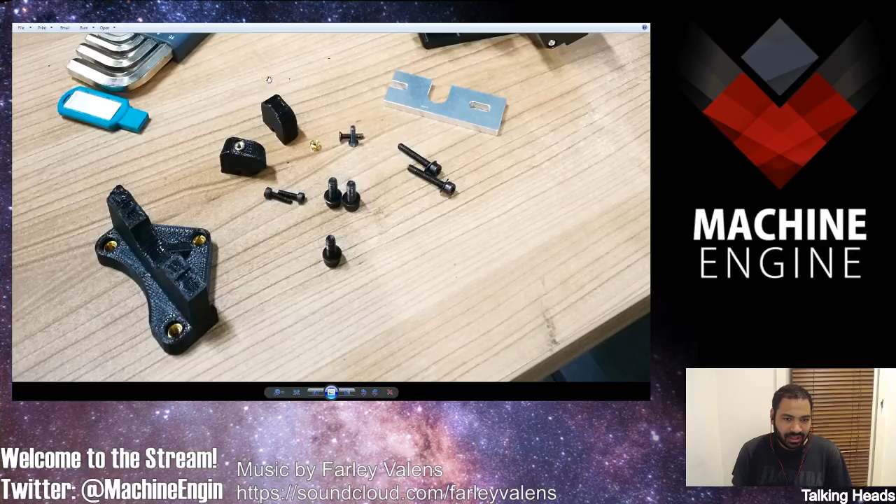Anyway, so the printer totally busted - the print head was just loose. As you can see here, this part is like broken in two, no idea how this happened. Completely insane situation. I took it apart and you can check it out here - this part is supposed to go here, this part is supposed to go here. Completely busted, the printer head, yeah.

And here's the extruder - well, this is the extruder right here, it goes in there, comes out here. Here's the motor where you put the filament in, it goes down there. So yeah, no idea what happened here, man. Completely crazy situation.

Yeah, this is the part that broke - it's actually the mount where the printer head and extruder sit on. So here you see the broken pieces, these two. Some heat inserts that I took out. This is what it's supposed to look like - I just put this part on top, it's not finished. This is still broken, and here you can see a whole piece totally fell out of it. I don't even know where that piece is, it's somewhere, I have no idea.

So yeah, completely insane situation, the printer's busted. Don't know what happened. Luckily, the makerspace we're at does have other printers available for us. We just have our own because, whatever, we had this printer before we joined the makerspace, so I had the part printed on one of their printers.

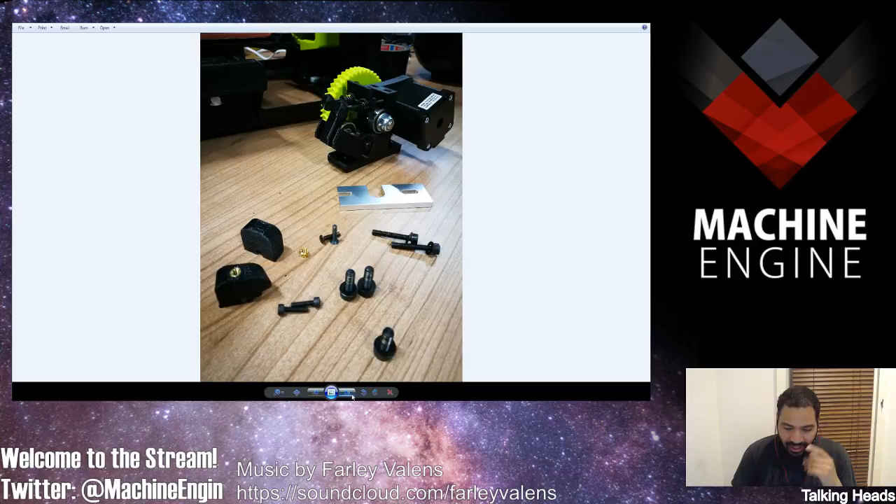I couldn't fix the printer the same day, even though I tried because I wanted to print it by the end of the day. Didn't work out, so I had to pick up the print the next day. Completely crazy, but I did manage to borrow their printer, because they had 2 printers at the makerspace available for us. So I borrowed one to print a new part for the printer, and I borrowed the other one to print out what I was working on, because I wanted to print the new module for the car.

Let me see, where's it at? Yeah, okay, yeah, so let's go back to Blender.

So this is the current car, not this part back here, just this front - this is what we're gonna be working on. This is the current car, it's pretty crappy - you just screw the wheel onto here. This is the wheel, it's pretty shitty, it's crap.

So this is what we're gonna be replacing. I have the new design here, way more robust. I have some ball bearings that I installed in it.

In this version, I didn't model the wheels correctly, so the wheel size wasn't the real wheel size - it wasn't very accurate. In this new model, I modeled the inner wheel, the outer wheel, and the tires. This is the rim of the wheels, and these are the tires. I modeled them correctly.

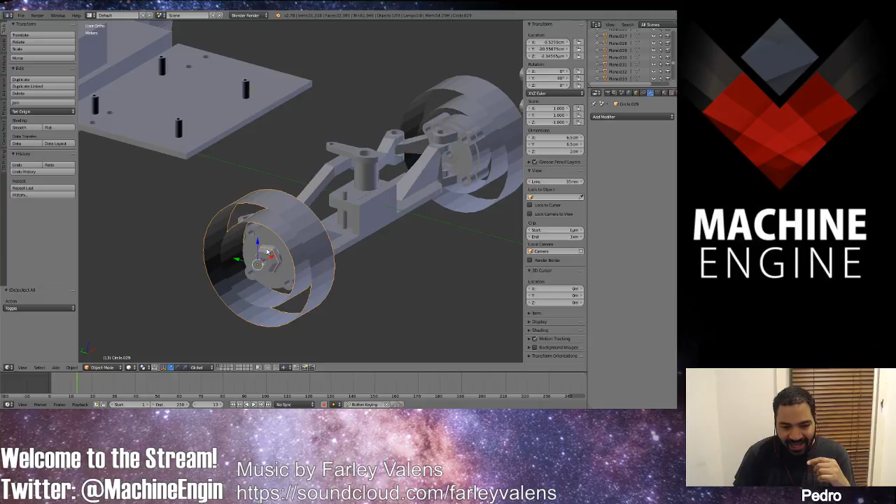I also modeled this hexagon line here - that's where the wheel sits, that's where you connect the wheel. So now it's modeled correctly. If you go to wireframe, you see that the line sits exactly on the part. Maybe you don't see it, I don't know, but yeah.

New part - let me see, yeah, the new parts are more robust. Look, it's kind of big, it fills the entire tire. The entire inner rim is filled with this new part.

The reason is that we didn't have small ball bearings lying around, I only had really big ones. These are 22 millimeter wide in diameter, 22 millimeter diameter tires. So yeah, that caused an issue because I couldn't really make it small - that's why it's this big. I didn't have anything else lying around.

But actually it makes a nice aesthetic, I kind of like this big part. Oh yeah, it's like, you know, robust. So yeah, that's the suspension there.

There's a servo. I'm still not quite sure on the placement of the servo, gonna have to look into that. Oh shit, not that, oh stop - okay sorry about that. Because the servo has to move this steering column, to move it back and forth.

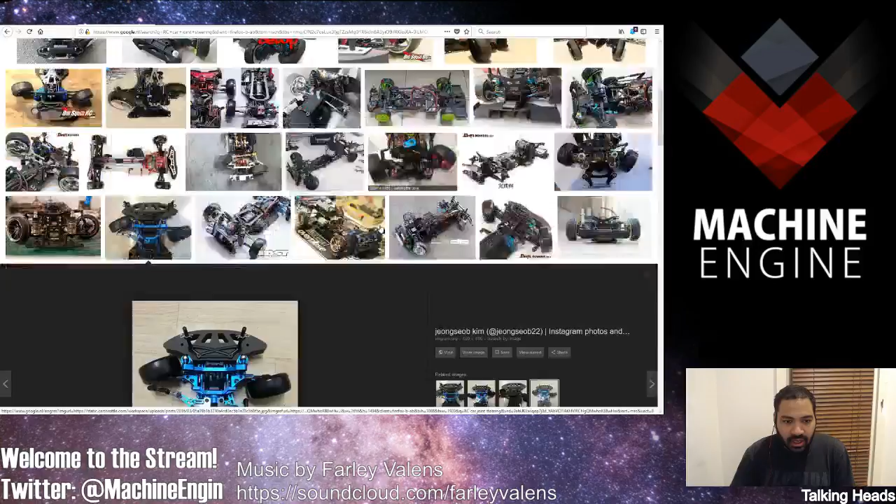The main problem is that we don't have the ball joints, so we can't make these joints... we don't have them, so we can't make the arm go in any direction. That's what you get with these joints - they allow you to make the part rotate in any direction you want, and they're really small.

They're like really small joints, so we can't print that out in 3D. It's not gonna work out. This is like really high precision. Our printer will not be able to do that.

Yeah, here's some other pictures. So either we just buy it and then install it, which is pretty easy actually because it's just a screw. Eventually we're gonna do that, but right now we're not gonna do it. We're just testing, we're just messing around. When we have a more final design, when the design is reaching finality, we're gonna start thinking about replacing a bunch of parts with

store-bought parts, like the chassis for example, this kind of stuff. You can buy a chassis or whatever. But one of the first upgrades we're gonna do is getting these ball joints, because it's gonna solve this problem I'm trying to solve here. That ball joint solves it right away. I mean, all I have to do is make a screw hole here, screw in the ball joint, make a thing, and then you're done. Make a thing here where you can screw in the ball joint, and that's it.

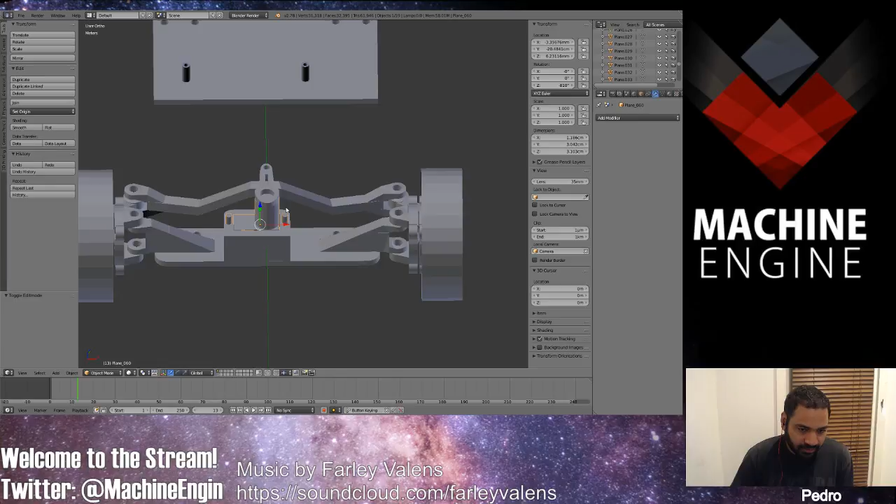Let me grab the servo with the thingy. Front view, go to wireframe. Nah, that's not handy. Okay, rotate it. Go to rotate 180. Yep, upside down. Let me go top view, wireframe.

Align it again. Actually, let me rotate it again. Let me do 180 again. Align it again. Grab this guy, rotate, whoop. There you go. Now let's see how high it is.

So if I screw it in, it's gonna come here, which would put it... oh, it's too... no, it clips right into the bottom. So let me see, if I raise it up, it needs to come...

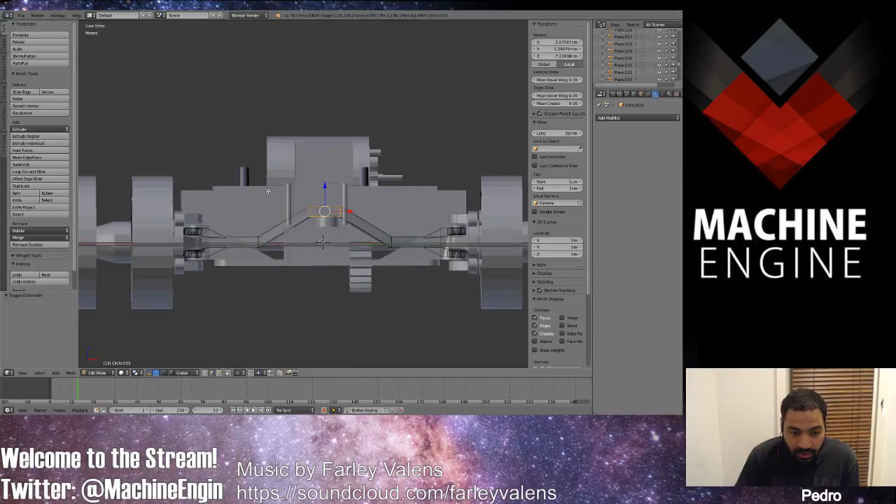Hold on, let me edit this guy. Let me put it straight. Okay, so it's straight. Now, the servo.

Nah, not like that. So like that, it clips into the bottom, so you can't have that. So it's gonna have to be turned like that. Yeah, there we go. So it's going to be at least like this, but I'll put it a little higher to be safe.

I don't have a copy of the servo with me, so I can't really tell. So this guy's gonna have to be elevated anyways. The question is how high.

I can just do it that high, because I want to get that swivel arm in there, but a small swivel arm, to allow the back and forth movement. Only problem is, because now it's on this side, it might actually interfere. But let me see.

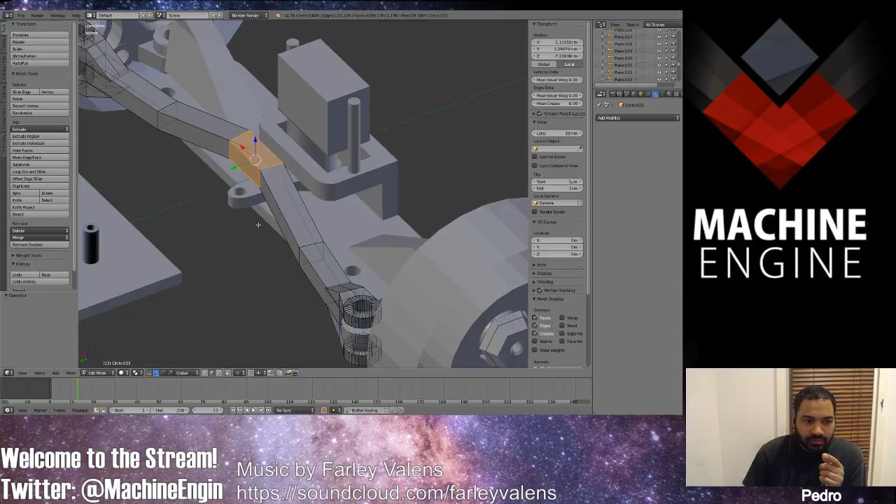I could push these lines back and then have the slope start earlier, giving me more space down here. Yeah, I'll do that, like that.

And then, like that, see, the line starts earlier. Alt click like that, and then GG. Then you can move the line. GG, easy, you know what I'm saying?

Yeah, there you go. So now it's moving. So GG is actually the command you use to move the line, so that's hilarious. You press double G and you can move the lines, the edges, across the model. It's hilarious.

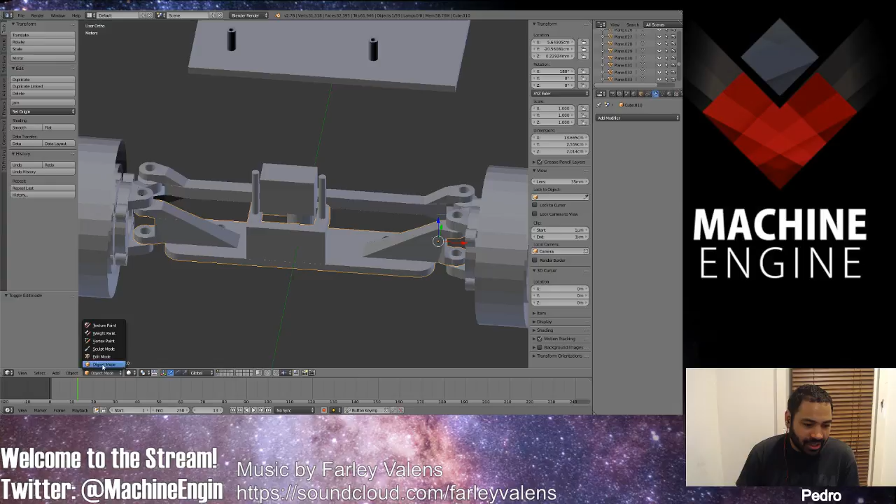So now it gives me more space, you can see that. So I think this will work now, and it's not that crazy, except I just have an upside down servo at the front. Yeah, it's pretty cool. Let me put this back. Now this part, you're wondering how to fix that — so this is easy, just do it like that.

Let me turn it this way. I just pull it up towards the model. So that should be elevated towards the height. And now there you go.

Now I put the servo upside down, and I can put in a swivel arm. I actually have to punch in a hole right here in the servo. In this arm, I have to punch a hole to make the whole assembly work. But yeah, pretty much I'm pretty sure this is gonna work.

I don't have time to make an animation or anything like that tonight. But I'll just print it out and whatever. Oh yeah, speaking about printing, let me save this first.

So like I talked about earlier, the printer broke. Hey Penike, what's up? So I talked earlier about how the printer broke. I don't know if any of you guys were there, but yeah, we had a major malfunction at the makerspace, and our printer broke.

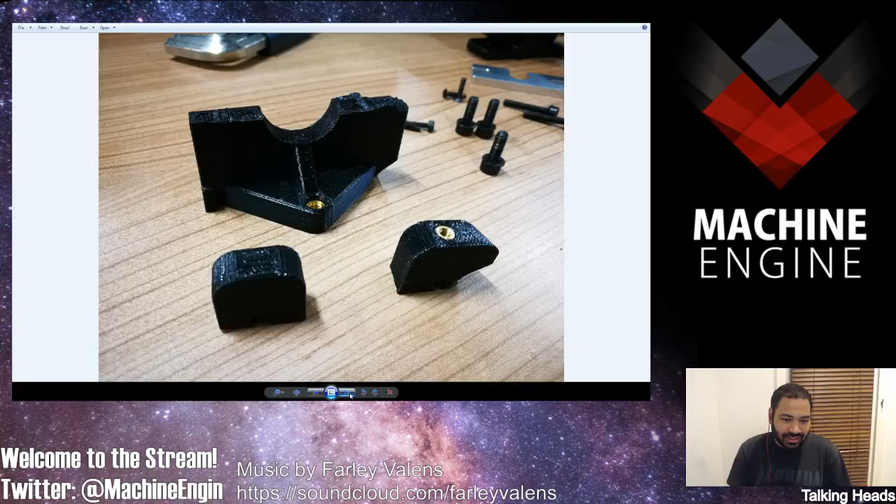We haven't made a test print. These are pictures of when I took it apart. This is the part that broke. It's in 3 pieces.

Yeah Nemo, I'm just saying you were there. I don't know. You know, just like us.

But anyways, so the printer's fixed now, but the other printer we used was a stupid slow printer. It's an Ultimaker 2 Plus, the other printer. It's like 500 euros more expensive, and it was okay.

I wanted to print the same part out on our printer, and the printer said it would take 2 hours. I went to print but our printer couldn't print it because it was broken. So I went to the other printer that was there. It's not our printer, we borrowed it from somebody at the makerspace.

Same part, same settings. It took 15 hours on that other printer. 15 hours. Worst part is, it took 15 hours, and it came out broken, completely useless. Really, come on.

I printed it on Monday, but I couldn't be there on Tuesday to see the result. Rick was there on Tuesday, so he managed to grab the print, and it came out in 2 pieces. Stupid printer. Let me see if I can download it.

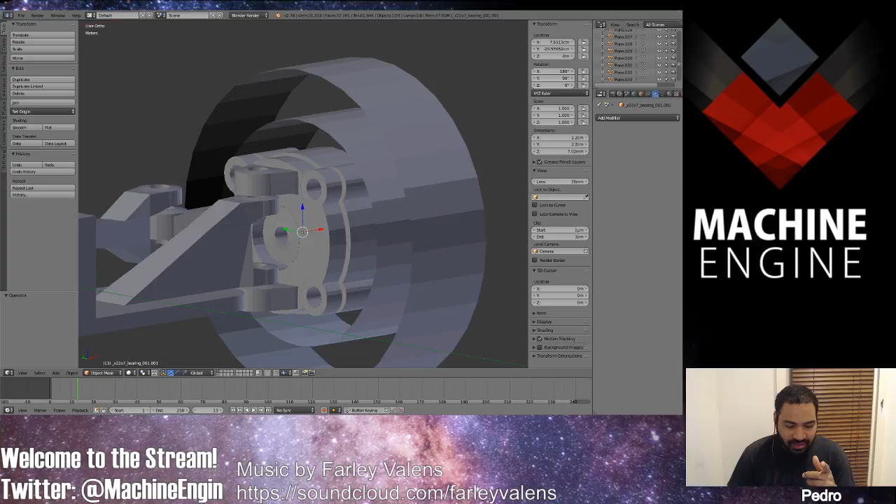This arm is for the steering column, because I made the part with the old wheel model. Let me show you guys - where's it... let me go back, yeah it's on Blender. Here, this is the old model of the wheel, and the size didn't match. Also I didn't have the inner rim modeled, so I couldn't tell how big it needed to be on the inside.

So I modeled the wheel again. Now it matches the exact size of the wheel, and the inner rim where this part sits is actually modeled correctly. What happened was this part here was clipping into the rim, so I fixed that now. But it's not fixed on the first one, because I only noticed it when I printed it out on that other printer of theirs. This is what it looks like printed out on their printer.

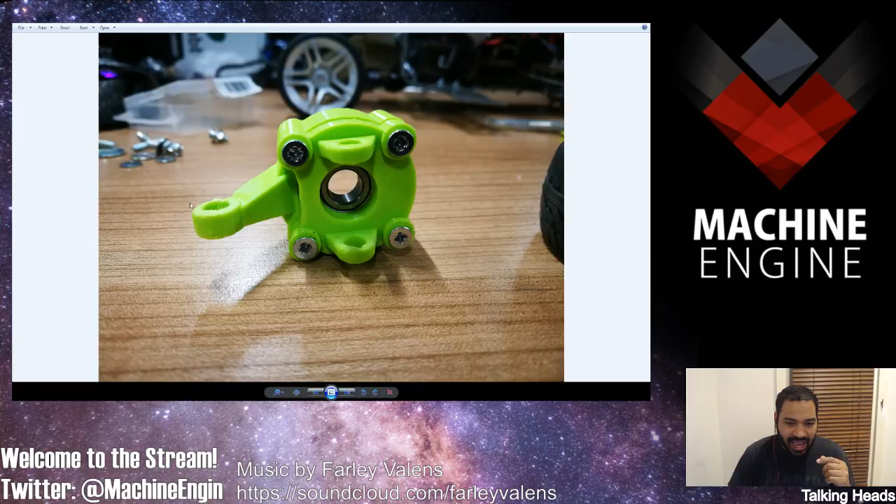Man, that printer is also a crappy printer because it had all these weird artifacts here - you can see it's jagged, really bad. Anyways, this is really crappy jaggedy shit, but this is what it looks like.

The ball bearing goes in it, you screw it shut, and then here you put the swivel. You can see it here, the swivel thingy - the swivel goes around there. I didn't print that out yet, I just wanted to print out this part to check the tolerances.

See, now look at this crap. That printer they have is really shitty. It's slow, and it took 2.5 hours to print this thing. This would have taken like 20 minutes on ours, and it would have done it better. Man, our printer's way better.

Look at this, look at this - this here looks all weird. Man, it sucks. Oh, that's the wrong size. Is that all? What the hell? I had more pictures, hold on. That's weird, I thought I had more pictures. Let me see if I can track down the other pictures.

I'm trying to track down more pictures, hold on. So weird. The pictures are on my phone, so I'm transferring them, putting them on the computer. Okay, they should be up there in a bit.

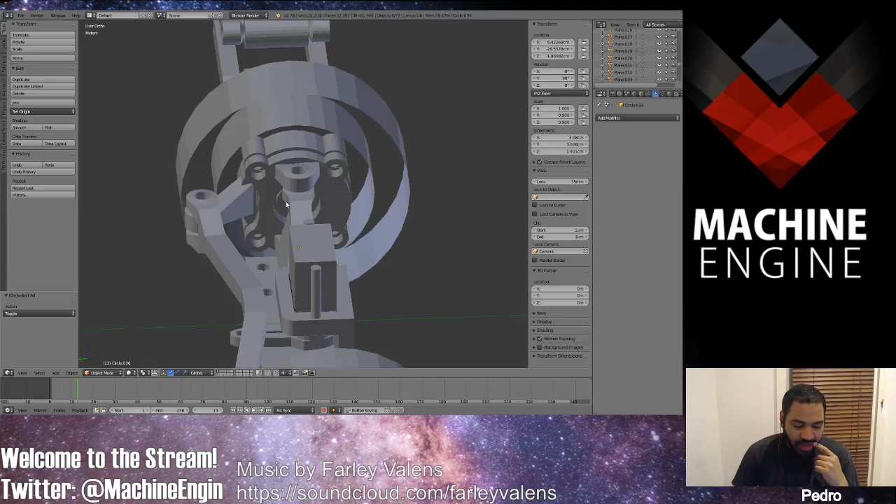But the first thing I'm going to print on Friday is a new printer assembly part with our printer, and get it. Then I'm going to replace it again, and then print out this part.

Because I don't trust that part that Ultimaker printed, especially since it came out broken and we had to glue it back together - it's a really critical part, and the assembly it's holding upright is pretty heavy. So yeah, that's a big problem.

Yeah, so that's the printer thing - well, not the printer thing, the wheel thing. So I wanted to actually - yeah, Ultimaker, man it was really stupid, I don't get it - I wanted to see if I could, because I'm actually pretty far on this model.

This is pretty much the new car. I already did some - we're going to keep the single axle thing for now, and this is the new motor assembly with the gear. Oh shit!

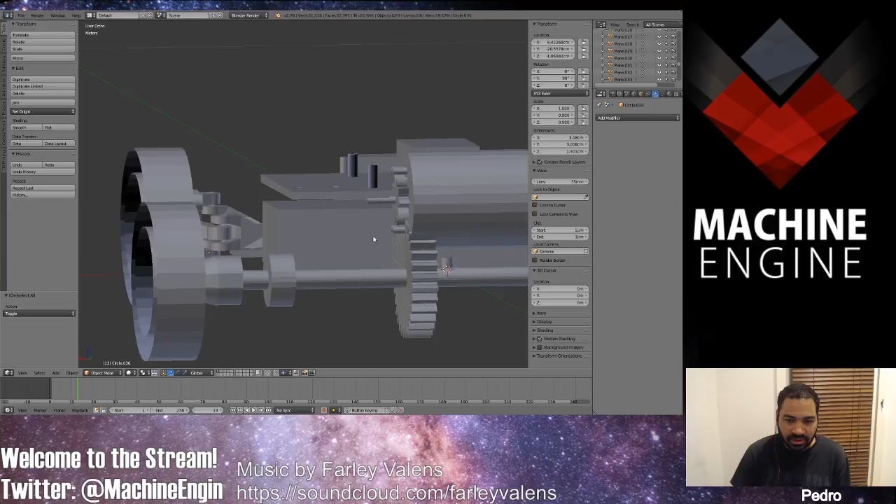It's clipping into the motor there. Let me take it out. Oh, go through the back. There we go, let me take that out. Yeah, put it there.

So this is actually the new assembly, the new car design or whatever you want to call it. I was going to put active suspension in the car, but it was a bit too complicated for now, so I just put a rigid part for now. But later I'm going to add active suspension - this is pretty much a blocking for the new car, for the new design.

And here, this is like the ESC, the electronic speed controller for the motor. And this is the battery. And this is where the Raspberry Pi is going. I still haven't figured out where to put all the other stuff.

Oh shit. Getting some weird stuff. Yeah, I still haven't figured out where to put the other stuff. I wanted to see if I can do that now, but actually right now I wanted to mostly just figure out how to do the stuff we need for the Friday stream.

This is not needed for the Friday stream because Friday the only part we're replacing is the front steering. Let me show you guys - the old front steering, this is what we're using now, is really shitty.

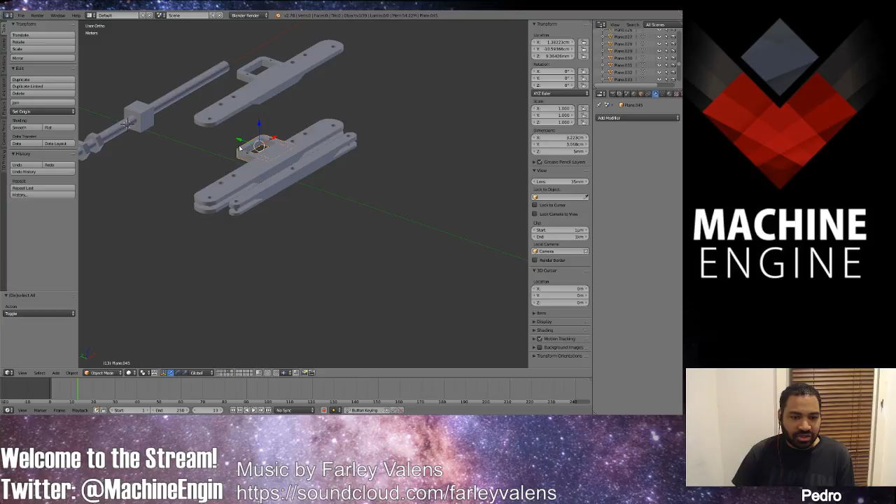Actually, we're using an updated version, because that's this version we're using now. This is the front that moves back and forth like that. This one moves back and forth. Oh, there we go. And this is where the servo goes here. Yeah, it's pretty shitty. It's crap.

So completely redesigned this thing. New design. Earlier we fixed the servo, put it upside down, so we didn't need to raise this bar so high. It was way up here. Now I managed to lower the bar and put it, and now that it's like this, it can swivel more. But I think it might cause issues with being able to remove this part, because this doesn't stay in there. This part just can be removed. It can, oh shit, because this can pop off.

We noticed it, so maybe that might cause some problems. We'll have to look into it when we print. Another idea I had was to make this detachable. This part where the servo's in, make it detachable. That might be a better plan. And then you just screw it in from the bottom. That might work out better, because you could basically just put it anywhere, allowing more modularity maybe.

I'll make a copy. Copied it. That's what it looks like. Hold on, I'm having some problems with this thing on the side here, this second screen. Hold on.

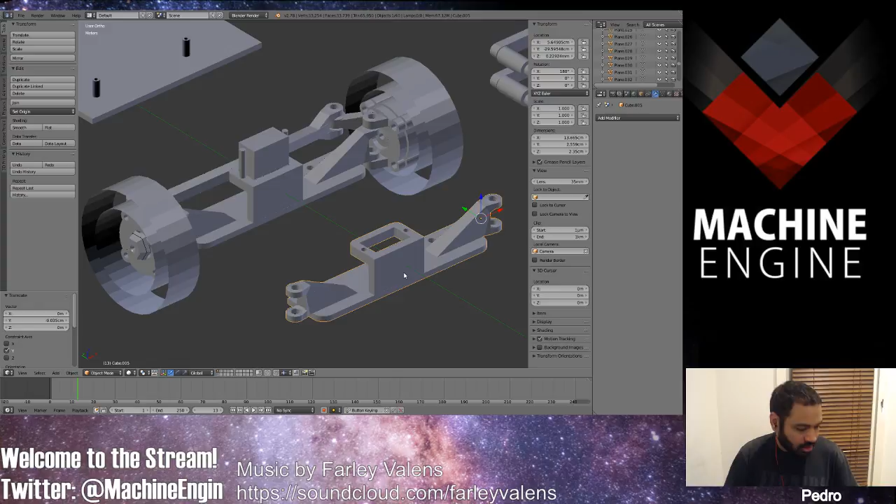Oh shit. Okay, so back to the story. Yeah, I'm gonna see if I can. I'm gonna separate this out. Actually, make a copy of. Hold on. Let me. Okay. No, not that. This and this. Oh no, not that. Copy. There we go. Copied it.

So, oh shit. Okay, let me, because I want this guy too. I want this guy too. Okay, did it work? Yeah, there we go, now we got them all three. So copied that.

Let's see. Now, oh shit, wrong window. Yeah, I was looking at something else. Now I wanna put the servo back right side up.

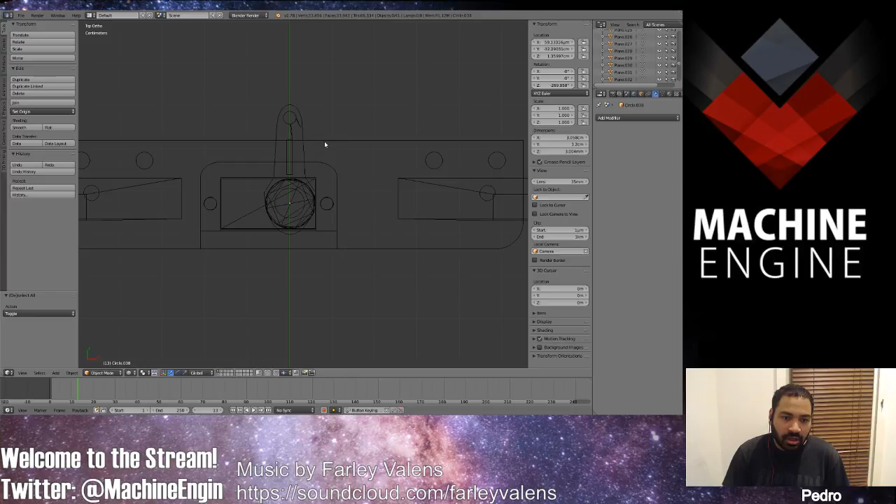Let me just 180 it. Whoop, 180. There you go. Wireframe it so I can see the buttons. Oh, let me rotate it again. Another 180. This time this way. Yeah. Oh, fits perfectly. This guy, rotate it. 180. Oh, no, it didn't do it. There you go. 180. There. Okay. Take it out of wireframe.

Going like that. Front view, 4-4-4-4-4. Oh, 4 to get it on that side. Yeah, let me wireframe that so I can see what I'm doing. Oh yeah, okay. So this is, if you push the servo to the bottom, it's clipping through the holder.

So let me go back. Select this guy. Oop. Go to edit mode. Yeah, it's still selected in the thing. So just pull it up. Let me give it a little space, because sometimes, you know, 3D printers can mess with you. If your tolerances are too low, if you got like a millimeter, it's probably gonna screw up, and you won't be able to push it in. So there we go. Now it's back to the original position it was at the start.

Let me save that. It's back to the original position it was at the start of the stream. Here I put it upside down. Here I put it like this. I noticed like a lot of RC cars have the servo lying on its side and stuff like that, but they can do that because they have the swiveling ball joint thing I was talking about earlier. We don't have that, so we can only do like perpendicular.

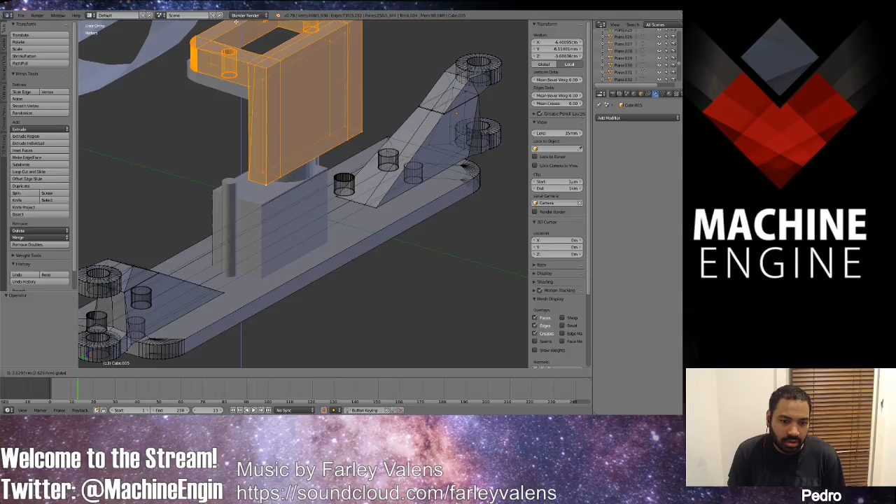Let me pull it out this way. Yeah, there you go. Pulled it out. Yeah, put it back in. You should make sure I got, yeah, there you go. Pull the whole thing out. Now select, bottom.

What I'm gonna do is I'm gonna make the bottom as tall as this. There you go. So yeah, see that? Yeah, holes. Now I can put holes in there. The thing is, oh yeah, another thing. Forgot about that. Let me do this.

It has to be a separate model. Well, no, it doesn't really have to be. It makes it easier for modeling if you make it a separate model, but it can be the same model and you can 3D print it. Yeah, it can be the same model, you can still 3D print, but whatever. No, make it a separate model. 3D printing is also going to be, because sometimes you just want to print just the part, and if you 3D print, you're going to print everything.

So to separate the model out of this mesh, you press P, and it says separate, and then you hit selection. Computer is slow. So now you see it's red, that's because it's out of this mesh, so you can't do anything with it anymore. So go out, object mode again, and you see now it's deselected, and now it's a separate model. See, boop, boop, boop. It's a separate model now. You can set origin to geometry. There you go. Now you see it's its own thing.

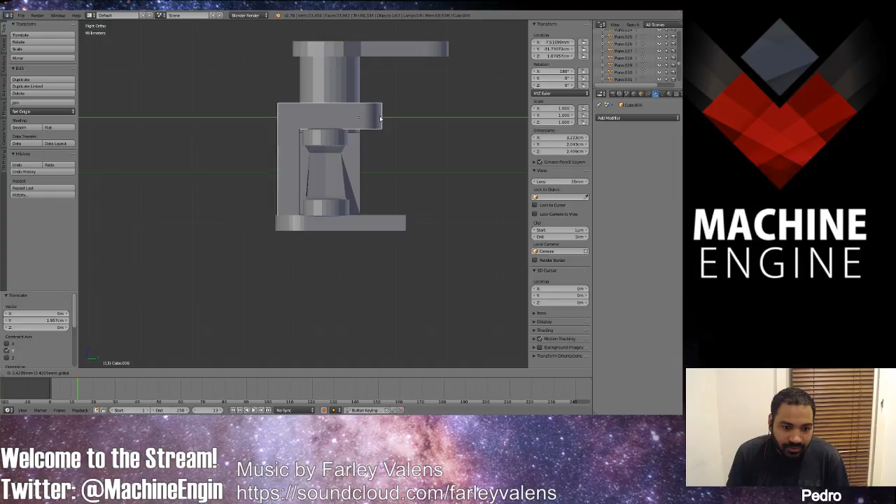But first I wanted to actually put this one back here. Number 3, put it back, number 1, and then go into edit mode. Select the bottom, press B, select the bottom, and then go pull it up. There we go. So now it's sitting on top of this. So now go back out of edit mode. See, now it's sitting on top.

The idea is that I'm going to make holes here, and this guy is going to be able to be screwed in here. Something happened, by the way. So now go to edit mode. The funny thing is, this part I repurposed from something else, so I already have holes here. So these holes... oh, what's it doing? Oh shit, oh snap. Okay, don't do it like that.

So this is a hole. Now just grab it and pull it down. This part was pre-assembled already, so that's why it has a hole in it, and the hole works perfectly, so I'm just going to reposition it. I repurposed this part from something else, that's why it has a hole. So now I'm just repositioning the hole to another location. I don't need to show you guys how to make a hole in Blender for this thing, just repositioning it.

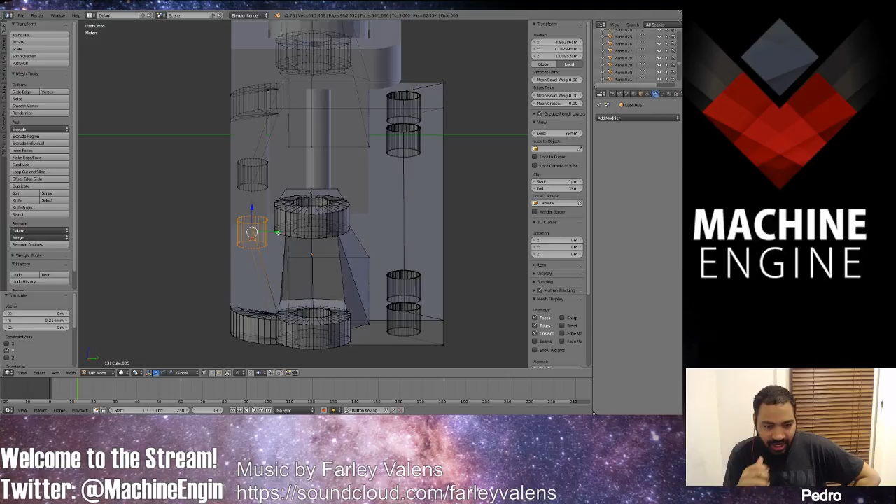Hey Tardigrade, what's up? Just making some holes. Let me see what it looks like from on top. Okay, yeah, so that's what it looks like. Yeah, so those are now holes there.

If I move out and I pull this guy out... what's going on? That's not right. Okay, something's messing the holes up. Let's see. Okay, oh, this is a good idea. Last time I tried to show something and it didn't work.

There's a good chance to show it. Check all, let's see the errors in this object. So you've got 120... this is a plugin for Blender for 3D printing. You can say check all, and you check the mesh to see if it's working properly. And apparently I have 128 non-manifold edges. For 3D printing, the most important thing to check for is non-manifold edges. Second most important is bad contig, bad contiguous edges, whatever. Well, we're in luck, we have 0 of those, so we're fine. But non-manifold, we have 128.

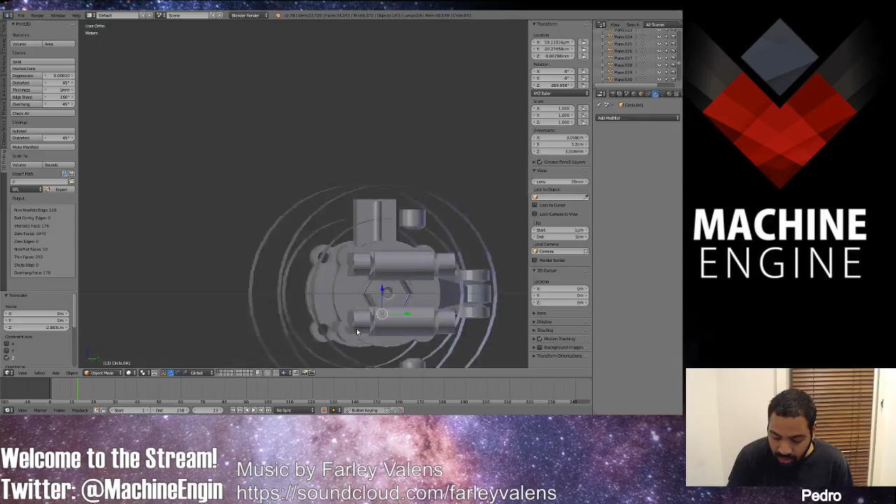Let me go to wireframe. Oh no, that doesn't work. Top. Weird, what happened? Okay, there we go, so now it has the servo arm again. Okay, there you go, so yeah, oh, wireframe.

There you go. Yeah, so now this is how I have the servo, upside down, because otherwise I'd have to pull this arm way up here to get the servo arm to it. So now I need to figure out a servo.

Actually, I think that swivel arm we have attached on the current car, we can attach it at the end of this one and then attach it to here, so I think that'll work. But I'm trying to make a separate version where the servo is detachable with its attaching point, this thing. So make this whole thing detachable, so we can pretty much just stick the servo anywhere.

But we need the holes, and I just showed the holes, but the holes didn't work. You can see it here. The holes are non-manifold. Go back to edit, you can see, let me deselect. So you check all, it checks it, and it said you had 128 non-manifold edges. And there they are. I wonder why they are non-manifold.

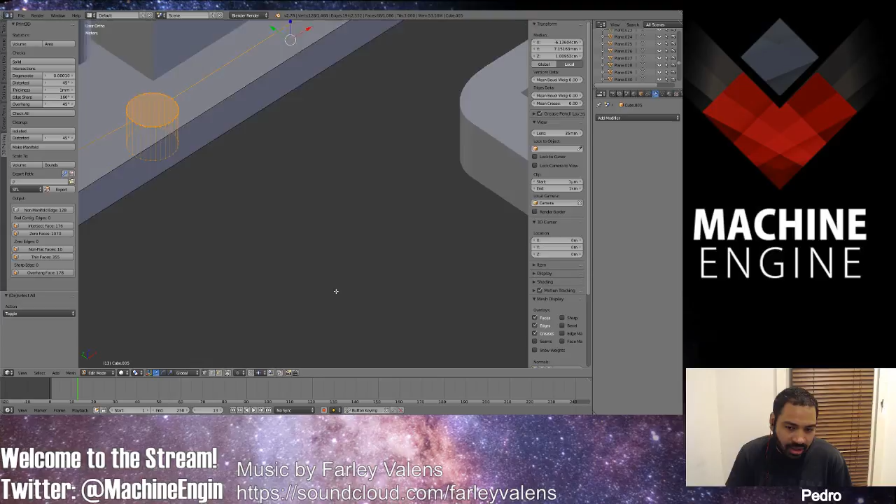So you have two options: you can go and fix it manually, or you can fix it automatically. It says make manifold, but usually automatic fixing destroys your mesh. So let's try the automatic fix. Let's see.

Whoops, yep, look at that, gone, everything's gone. If you print this out, this is what you're gonna get. The printer doesn't read the... the printer reads the manifold, the fixed version. So you're literally gonna get this out of the printer if you print this part. So you have to go in manually and fix it.

Yeah, what I'm thinking is there's like a face. Is there a face? Yeah, see, there's a face here. There you go, so remove the face. There's another face here, remove the face. Weird, there's like faces on this thing. Okay yeah, that's what I thought.

Yeah, we're gonna print all of this, yeah. And no, we don't want no faces. So you can see.

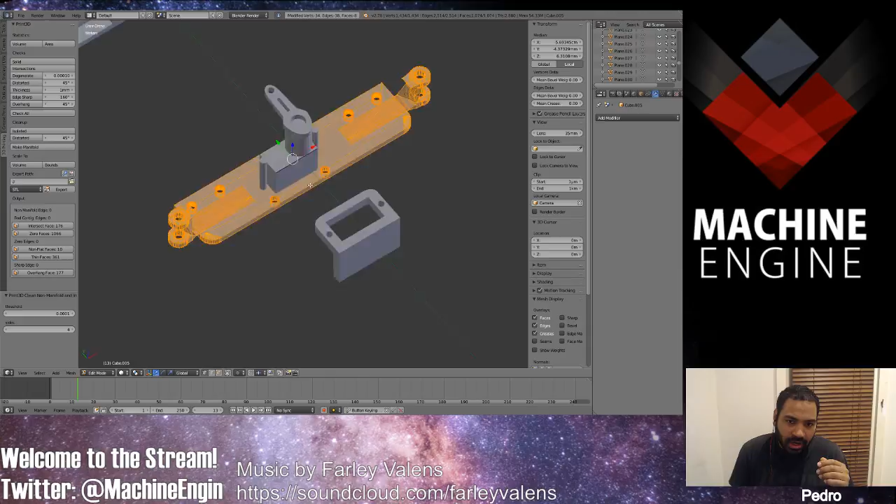Holy shit, what the hell is that? You see that? Whoops, I lost my... but it doesn't count as manifold. What is that? Check all, is that intersect? That's 0 faces. Oh, 0 faces doesn't matter. It's fine, 0 faces doesn't... it doesn't care. The printer doesn't care about 0 faces.

Yeah, so it's fixed. These are the most important ones: bad contiguous edges and non-manifold edges, and they're all 0, so the print's gonna work out, it's gonna be fine. So we got these holes now, that's what I wanted, the holes. Now put it back.

Let me see. So now we can just drill a part in there. Let's see, I wonder if I can.

Yeah, I can make a hole in there. I wonder if I can just do it without resorting to some stupid shit. I wonder.

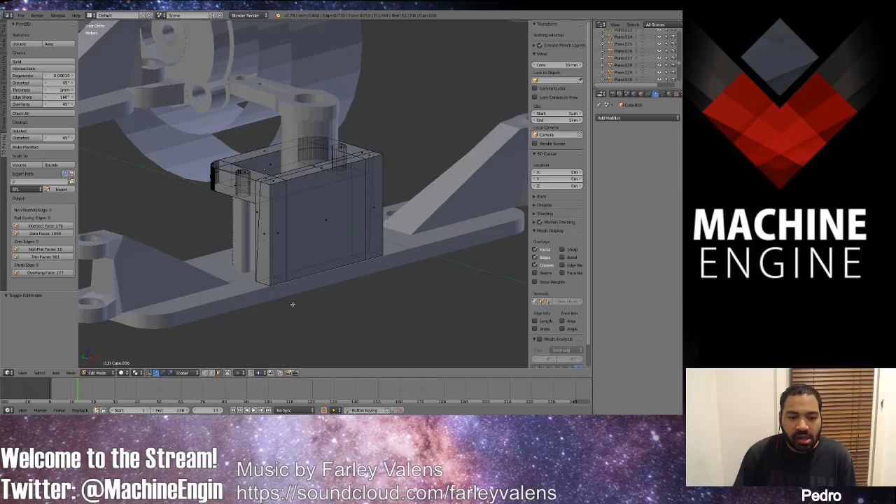Screw it, let's see. So how wide is this thing actually? This hole... whoa, too far. Zoom out. How wide is this thing? This hole is 3.5 millimeters, or 3.6 millimeters. Sorry, let's see now, what can we do?

I'll use some Boolean because I'm feeling lazy today. I'll do the Boolean thingy, but first I need to create a cylinder. Radius, that was 3.5, so... make it 3 millimeter. Oh no wait, 1.5 millimeter radius, and depth whatever, 10 millimeters. There we go. Where is it at? There he is, so now we got a cylinder.

Make a copy, Shift D. Look at it from the top, wireframe it. So you see here, you see the holes. Align it on the holes. I made it just slightly smaller in the hole, yeah, on purpose. There you go, that's good enough.

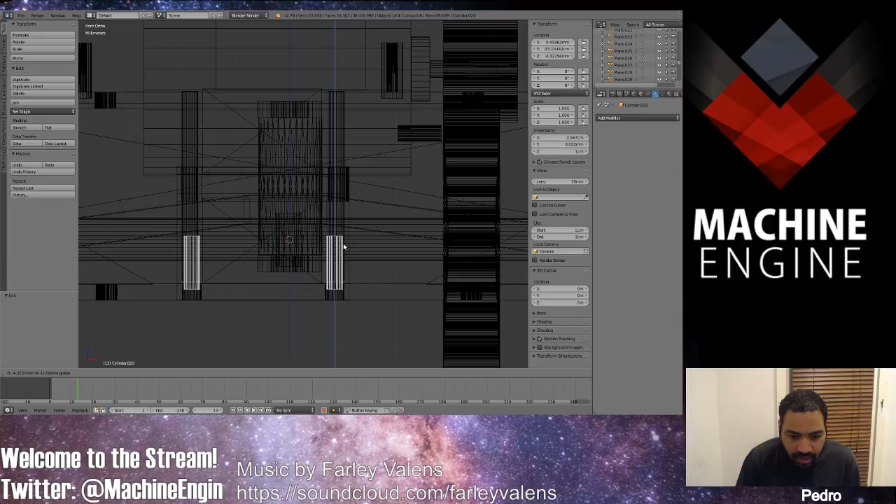I wonder. We're just gonna, what do you call it... that's kind of close, look at that. Ugh, I'll pull it, I'll actually pull it more like that. Kind of close. Okay, so now we got these guys just sitting inside the thing here.

I wonder actually what it's like. Put it back here, that's approximately where it goes. Go back to wireframe, look at it from the top. Yeah, it's kind of screwing up. I'll go back to this and go to edit mode. Select this guy and select this guy. Pull him down a bit.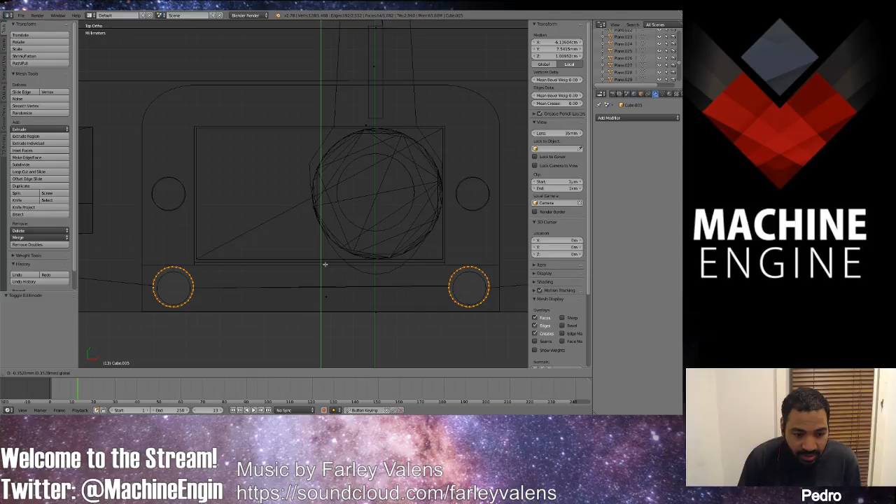Yeah, the tolerances are pretty crazy, so I'll just grab this. I'll grab this face and I'll pull it down a bit just to give me a bit more space. Just a bit more space. I mean, it's kind of messing up down here, but I don't care. I don't care, it's fine, it's okay.

That gives it a nice little bevel there, a little design, whatever, I don't care, it's fine. So yeah, move that a bit, gives me a bit more space to work with, because it might screw up on the 3D printer. Also, good, nice little indentation or bevel thing there. It's cool, it's cool.

Let's see, what you guys thought? Dragoon. Carbots dragoons, really? Banelings. Battle cruisers. Well, I don't know what you guys are talking about, but whatever.

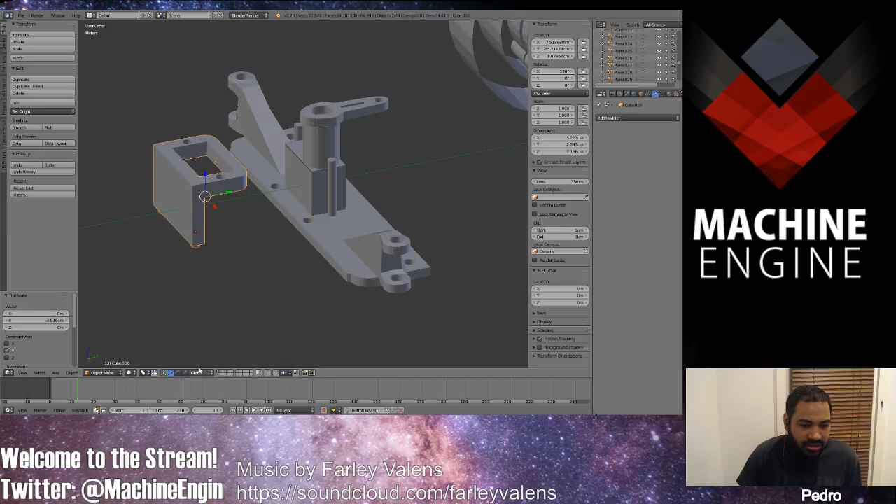So what I want to do is use a boolean because I want to make some holes here to be able to use this. So I just grab this guy, hit boolean, and then grab these guys. Whoops, there you go, see it disappears. Now do difference, so now it's gonna pull out, it's gonna carve out the shape in there. So if I then push these guys out, you see there's two nice holes.

No, it looks pretty good. But like we always do, we check if it's gonna do some intersecting issues. From the looks of it, it's doing something weird. Oh, what the hell is it doing? What the hell is this? That's so weird. Okay, why is the faces there? Okay, well anyways, it looks kind of weird, but it should be fine.

Four-legged spiders. Yeah, well we want four-legged spiders. I've been trying to convince Rick for a long time to do some four-legged spider stuff, but he's a bit skeptical.

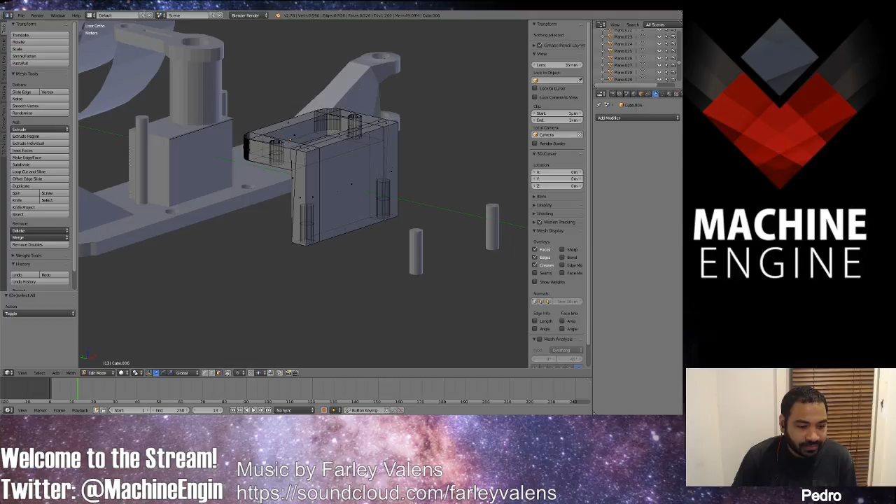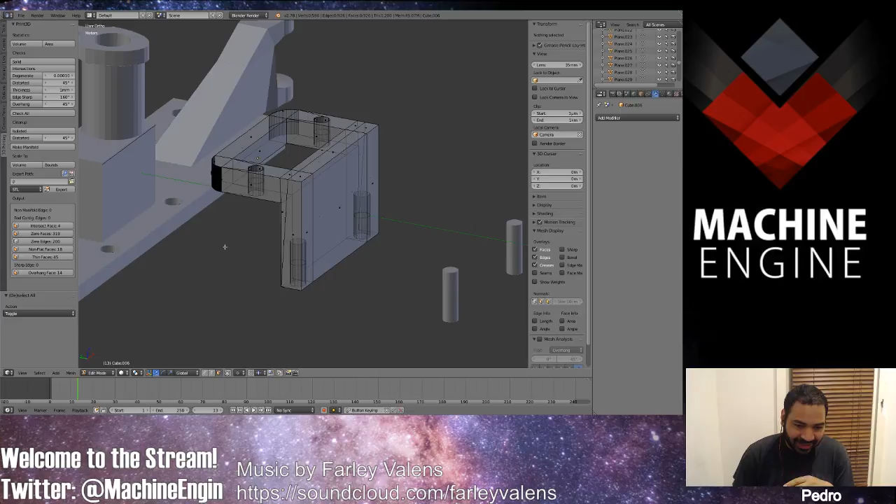So we made the holes, and the holes came out fine, with zero issues. Amazing, on the first go. Usually when you do the Boolean thing with the holes it can fuck up and totally mess up the model, and then you need to remodel the whole thing. But this one came out good on the first try.

So now what we have is cool - we have a removable mount with the holes for it. So now we have two options: do this with the fixed mount, but this one only supports upside down, or do this one with the removable mount. So, what say you, tardigrade? We're gonna do the removable mount or the fixed mount? Anyway, so we have those two options.

Let's see, actually this manifold thing is kind of messing me up over here. I think it's better to fix it here too, or else those bad non-manifold faces are gonna really screw up the print probably. Because I remember I copied this part to make the second one and fixed the manifolds, but if I don't fix the manifolds... let me do it. Check, there you go - no manifolds, but it still has the zero faces. But who cares, the 3D printer doesn't care about that.

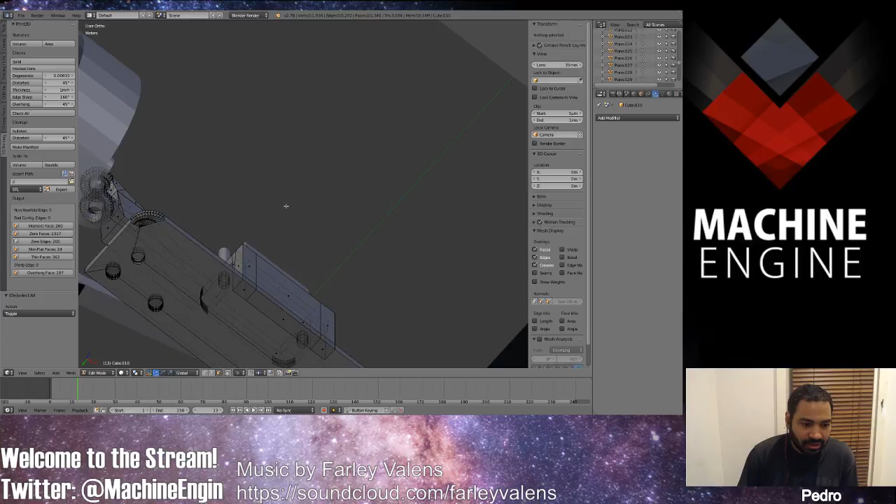Yeah okay, it's good. Now I fixed the manifold, so it's not gonna screw over my print, but it's gonna have this weird hole there, but it doesn't really matter, it's fine. I repurposed this bottom part from something else, that's why it has those weird holes, but it doesn't really matter - it's not gonna affect the print in any way.

So now we have two versions - you can mount the thing here like that, or this one with the attached one. We're gonna decide which one to print on Friday. We're probably gonna go with the detachable one because it gives us a bit more freedom I guess.

Only problem is if you have the detachable one. Let me put that back in there, put it back here like this. So that's good. Now pull this guy out. Pull out like that, put it that way, yeah. Put this guy in.

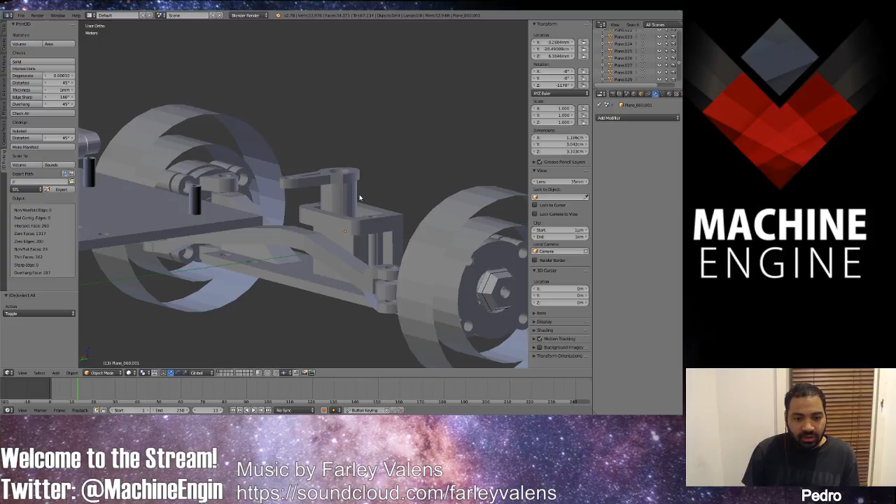Yeah see, this is the problem we had earlier, because the servo is so tall. Let me select this guy - I had to actually, oh it's deselected. I had to pull this up to here like that, to not have this weird arm thing there.

But you can also just flip the servo upside down, so actually I'm gonna try that. Go out of edit mode. Let's see, get out of edit mode. Let me pull this guy out, and then put this guy upside down into this thing. Ooh, it's upside down already, so we have to do it like this.

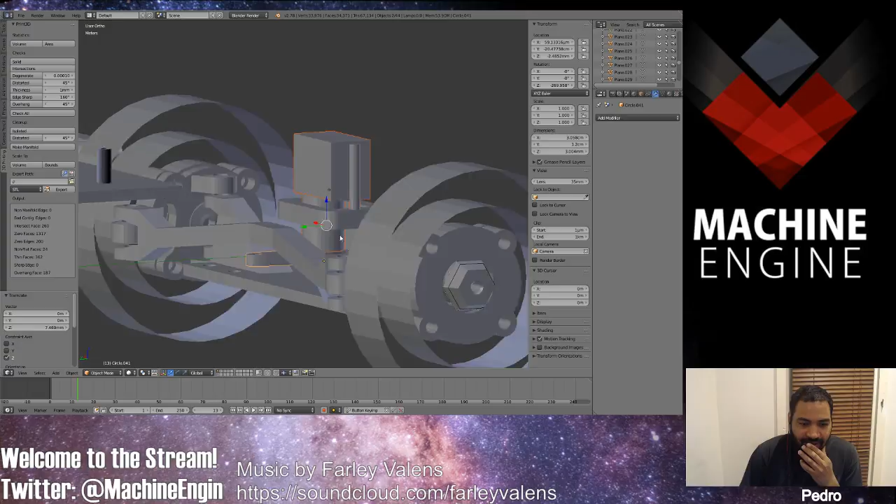No, that's not bad. Oh actually, it's probably gonna be coming in like that. Or can I put it on this side? No, that's too - nah, that's not gonna work. So I'm gonna have to put it in on this side. It's probably gonna come in like there, because here I have these little winglet things, so it's coming in like that. That puts it really close to the thingy here.

Yeah, the tolerances are pretty annoying in this part. I might just have to break this thing in two pieces, like I didn't want to do before. Yeah, I think I might just have to do that, just break it in two pieces.

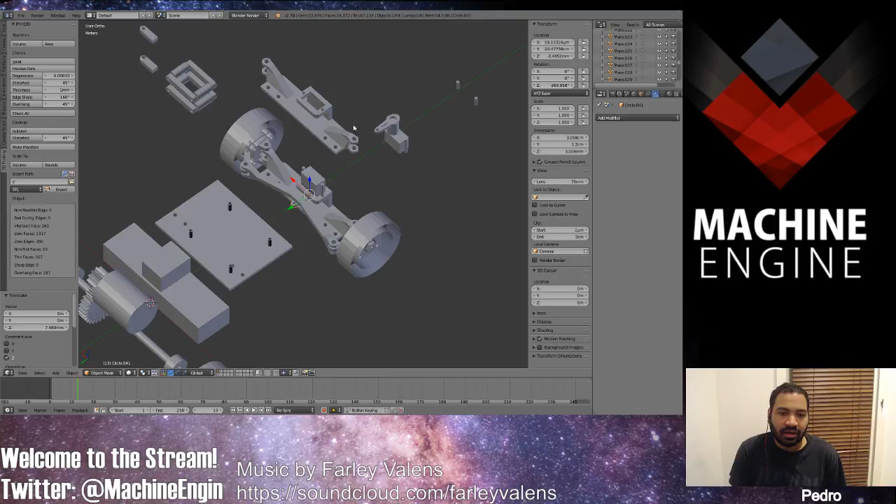But actually, if I just run a wire from here to there, I could double this up - just make two of them next to each other, of these holes. Can't see it right, okay here, let me illustrate it quickly. Just do this - like that. The whole one goes to one wheel and the other one goes to the other wheel, and then you're done.

I'm pretty sure that's gonna work. Yeah, it's gonna work. Pretty sure. Let me get that there.

Now I need to figure out how I'm gonna double this thing up. So basically I don't need to print this guy because this is too bulky, so I can just test it first with the wire thing, see if it works. If it doesn't work, I can still print that part, drill a hole in it, and put the swivel arm on it, and we're done. That's it, call it a day.

Let me do this thing here real quick - just make it double, make it a double. Let's see, select all, Shift D, make a new one, put it next to it. Now let's join these guys.

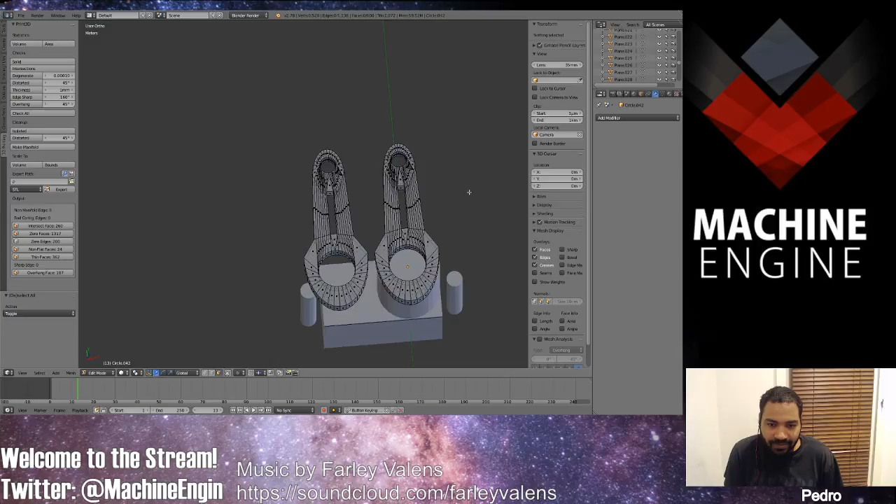How are we gonna do that? If you see, check all - whoop, yeah, look at that, it's good. I don't want to change the sizes and I don't want to cause any issues. So it has to be one hole here, two holes at the end.

So how are we gonna operate? Let me do B, like that, okay that does that. B - oh wait, no, 7. There you go, and then B, and do this. Okay, so you can select that. Let me delete faces. Okay, there we go, now B.

B - oh shit, bro. I'm lazy, just using B like a moron, whatever. Oh, why is it not selecting that? Select it. B is for... selected please. Yeah, there you go. So, I wonder.

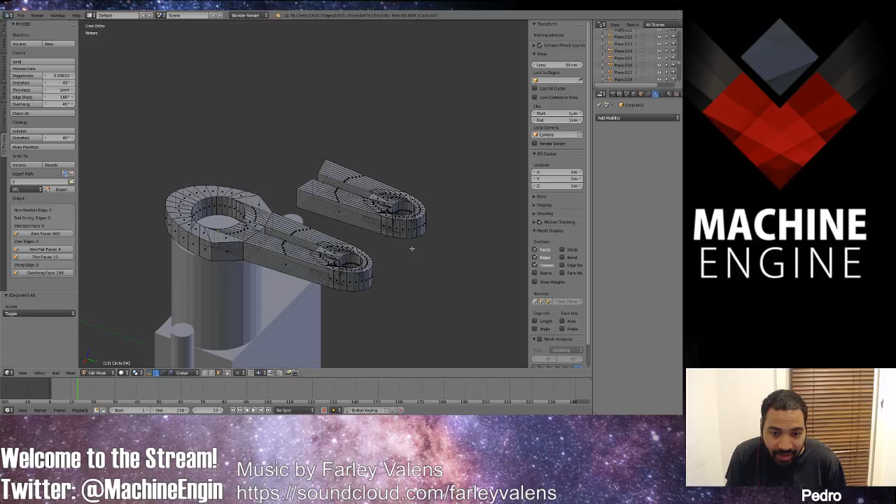Okay, I'm gonna do some just stupid hacking - I mean literal hacking, like taking apart piece by piece. Let's see, oh wait, I know - these faces. Oh no, not there. Like that, okay, these faces - delete, faces, there we go. Oh shit, got too many. Damn it, okay.

Okay, there we go, delete faces. Okay, there we go, that. Oh boy, how are we gonna do this? Here, delete faces. Faces, delete it - what the fuck is this? Why isn't it? Oh shit, the hell? Okay, that's weird, oh well, don't matter.

Let me go back to object then. Okay, that's weird, I thought I was... oh, that doesn't matter, yeah, there we go. That's why I couldn't see it - it didn't show up right. Yeah, see, now it's showing up right. It had this weird haze on it.

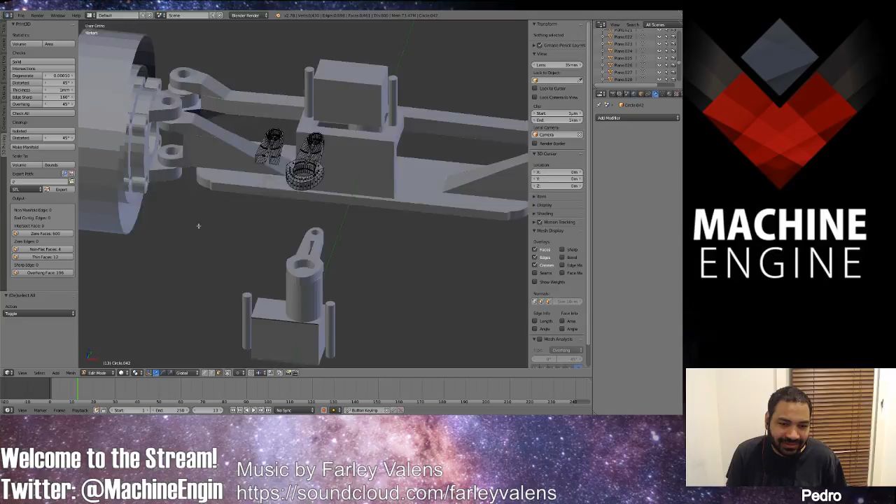Okay, yeah, what's all this stuff? Damn it! Get away! Ah. My thing's a mess, a big mess. I got too many things all over the place. Okay, there we go, make it up here. Holy crap, all that shit! Anyways, there we go, oh shit! Where's it go? Whoa, what's going on?

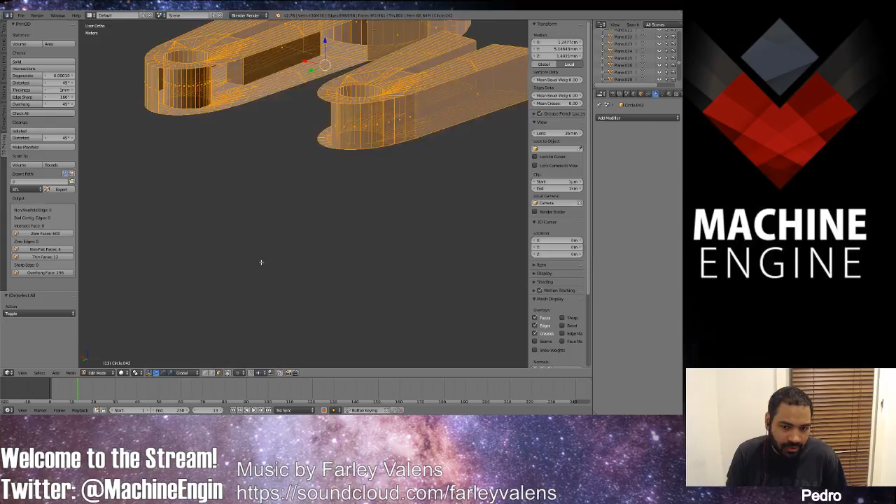Whoa, this thing is messing me up. My swivel point is like... hold on. Anyways, let me pull that back down. It's fucking with me, I can't turn the thing. Okay, there we go, that's better. But I have these stupid things in the way. Anyways, stupid troubleshooting, a bunch of crap. Doesn't matter.

Let's see, so now we need to get these things joined somehow. Okay, I can delete these faces too, actually. Damn it.

Yeah, there's a lot of, whoops sorry, whoop, a little cough. There's a lot of minutia in 3D printing. A lot of random bullshit that you need to take care of.

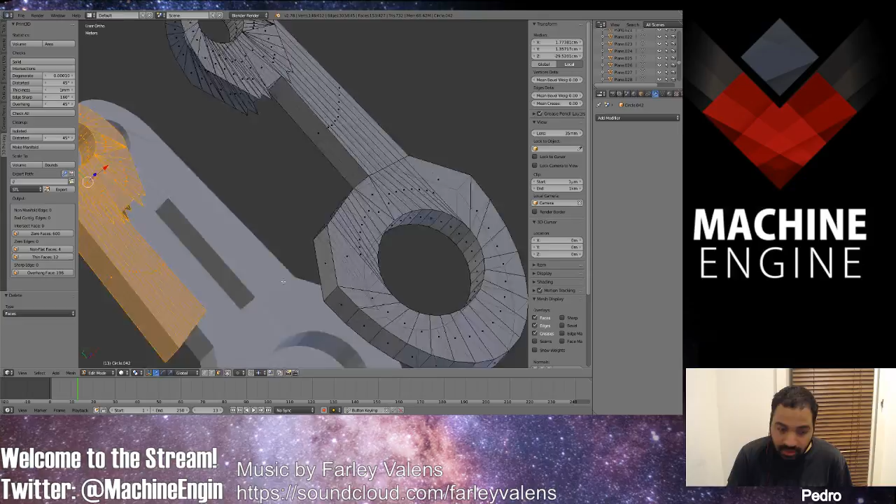And this shit is in my way. Selecting shit, delete faces. Okay, so now, there we go. I'm gonna try to just jam it in. Oh shit, ow, no. Okay, there we go, just jam it in. Of course that's not gonna work, but put it like this.

You know, at this point it's just easier to just start it again, start all over. Let me just do something stupid. Oh, not that way.

Nah, screw it, I'm just gonna hack it, and then I'm just gonna make it from scratch again. But then I'm just gonna use this as a guide. Put it like that.

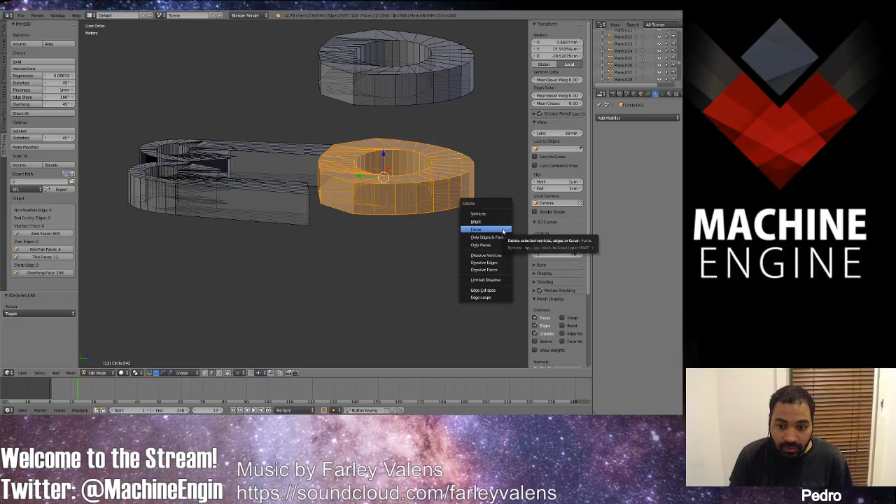Why is this doing that? Oh, it's selected, there we go. Oh, actually, copy that. Delete faces. Oh no, not you. There we go, okay, delete faces. Oh, that's the, okay, now I got it. Now I think I can get somewhere.

Go like that, get it aligned. This is pretty stupid, but it might just work. I mean, I could probably spend less time just rebuilding it from scratch, but this might actually be stupid enough to work.

Go up, go like that. This is really stupid, oh my god, I can't believe it. This is crazy, it might just fucking work.

Select that shit. I don't know if you guys figured out what I'm trying to do. Maybe not, I'm not sure. So press W, where you at? What's going on? Oh, W. Bridges, holy shit, it worked. God damn it, lol, it's fucking...

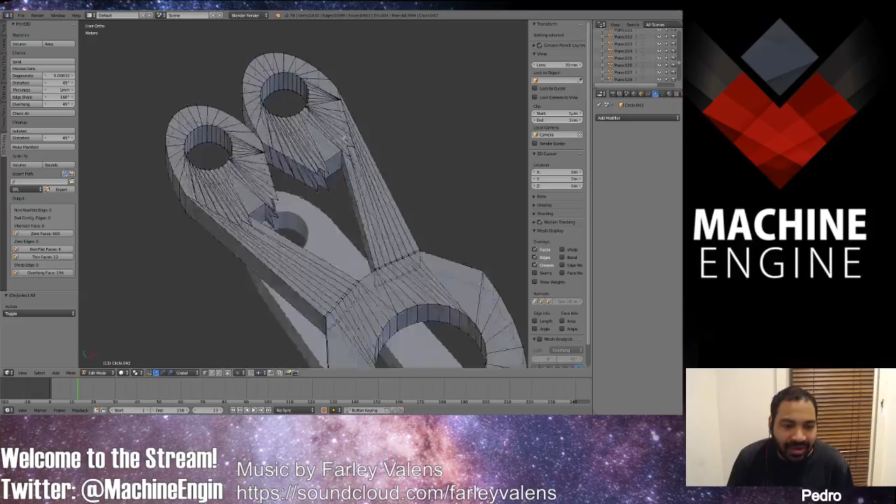Yeah, just hack together this thing. Look at that, wow. Holy shit, holy shit. Oh. Holy crap, look at it. Okay, now let's see if we can clean this up a bit in the middle, because it's looking like an owl. Woohoo, I guess.

Wait, let me first clean this up on the outside. Let's see if I can. What can I do? I can do this. Make a face here. Oh shit! No, whoa, damn, watch out. I can make a face here. There you go, make a face there.

I wonder, the wireframe. Okay no, they're fine, okay that's fine. Why is this not fine? Okay, well let's get this down. Select that, oh shit not like that. Select. Oh, whoop. Why is that one like that?

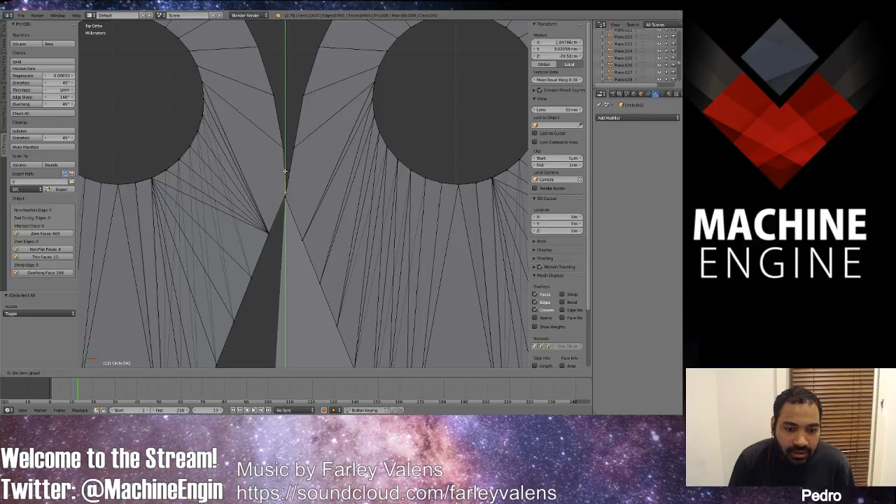Let's pull it down. No, it's not aligned, oh doesn't matter. So now we're gonna close this up. Let's bring this together. Go back to this, bring this together. Oh, no not like that. Like this, and then oh no, shit.

No, it's not gonna work. Okay, let's try a rotation. I'm not sure if that's gonna work, but yeah. Hope I'm not boring you guys with this crazy plan that is actually taking way too long, and actually probably just had to, what, a bit faster, you just make a block, punch 3 holes in it and call it a day.

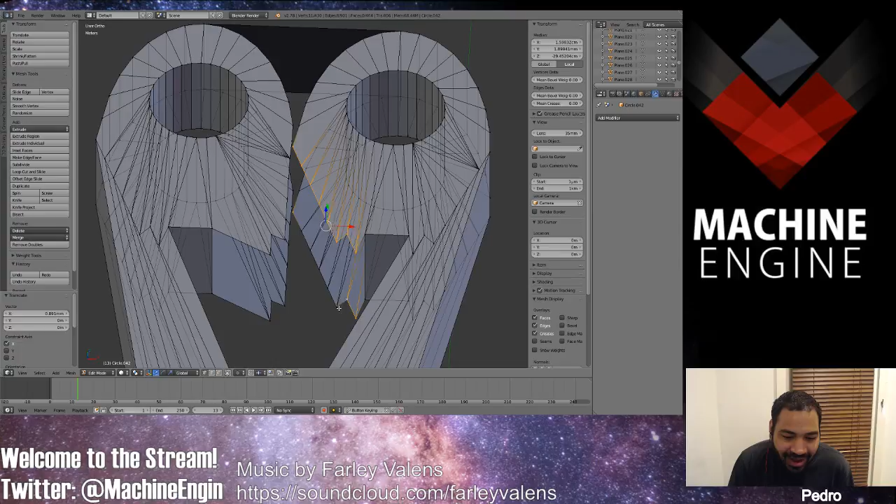Oh shit. Let's see. Yeah, this is what 3D design is like. Just freaking, yep, just a bunch of minutia and messing with little details that most people would probably never care about.

Try to get that straight. Yeah, okay, deselect this guy. Pull it out here, this guy, pull it out here. Let me see. Pull this to, you see this, you see now it's there. Go back there, this guy, pull it to there, go back, oop oop oop. This guy, pull it to there. Just pulling it, making it a straight line, all this crap, this jaggedy shit.

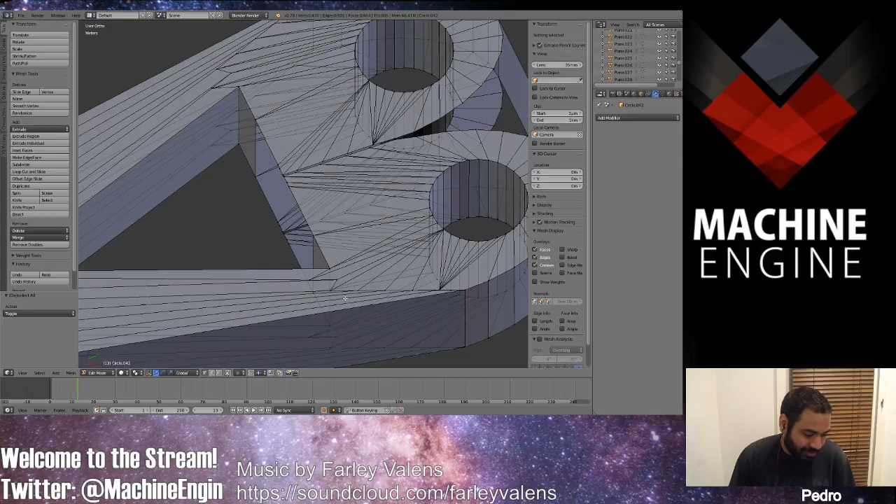Oh, my cat's calling. Bye bye. Hello cat, how are you doing today? Yeah, so just gonna do this. Ignore the cat. Oh no, well, can't ignore it. Hello, how you doing? Hi, what's up? Yeah, my cat's called Tifa. Like Tifa Lockhart. No, not Lock, damn, I forgot her name. Longheart, Final Fantasy, you know. Okay, hello. Hello, yeah, you're done, bye bye Tifa. Lockhart, yes, thank you.

And I was the one who came up with the name. Anyways, pulling this guy, look at that. Whoa, holy shit, oh, clipping. It's clipping, okay, was too excited there for a second. It started to clip through its own bullshit. I can probably fix that. Can I? I don't know. Whatever, I'll fix it another way.

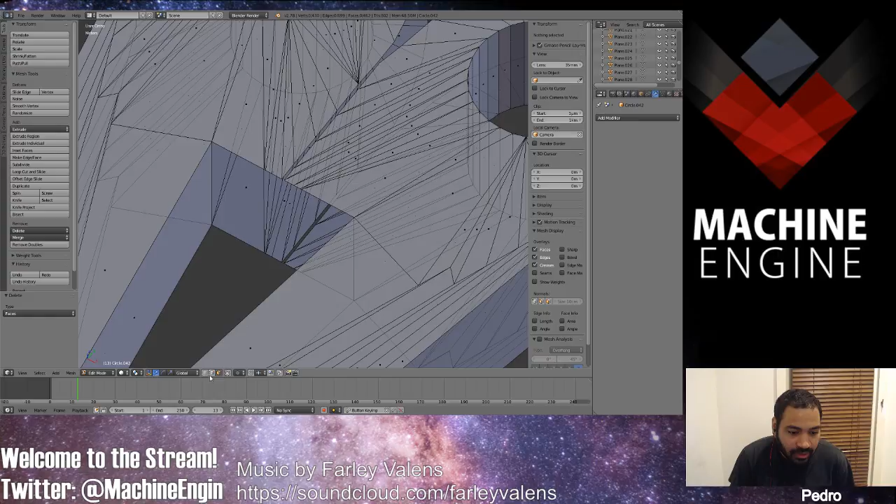This guy, pull it this way, and look at that. Yeah, I can fix that though, just delete face. Delete face. Oh shit, not the face. This guy. Oh shit, which one do I have to do?

Impossible to see, doesn't matter, do it like that, eyeball it. I like eyeballing, I'm lazy like that. Yeah, probably got too excited there, cat's fault, yeah. I can't believe I'm spending so much time on this crap. I could have just made a block, punched 3 holes in it, and I would have been done. But whatever, it's all good.

This is what 3D modeling is like, guys. It's not glamorous, it's just messing with a bunch of shit. Let's see, so now, oh shit, I forgot I had to bridge the loops. So now we get this joined. It's an ugly motherfucker.

Yeah, how do we do that? Oh yeah, I forgot I had this guy too. Shit. Okay, I got it, there we go. Click there, click there. Ugly motherfucker.

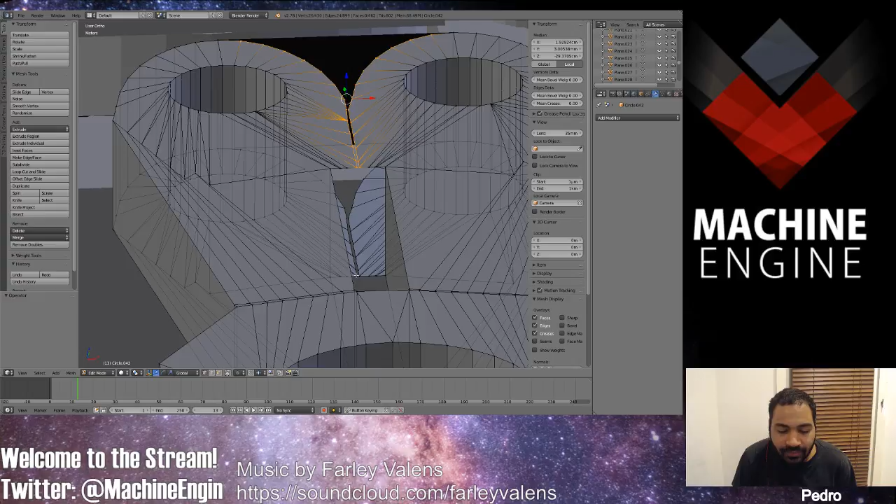I mean, I'm not even gonna worry about this, it's going all kinds of directions. Fuck it, I don't care, just gonna do this, click my way through it. Oh shit. And that's when I knew I fucked up. Let me get rid of that guy. Okay, let's try it, W, bridge edge loop. Oh, there it goes.

Well, the eyeballing is my fault. I'm one of those guys who just doesn't learn to use all the stupid hotkeys and all the other bullshitty stuff. I'm like, I'll just click my way through it. So yeah, I guess, I don't know. It makes you, it's kind of like doing it the hard way. But it's like lazy, but so lazy that it's actually cost more time, more work, just because I like messing with the hacky stuff. Whoa, look at that!

See that? You gotta watch out, or you grab something that's not the place you're supposed to be grabbing. Yeah, do that. Did it work? Yay, it worked. Do this guy. There you go, now that's done. Now I have to do the middle here.

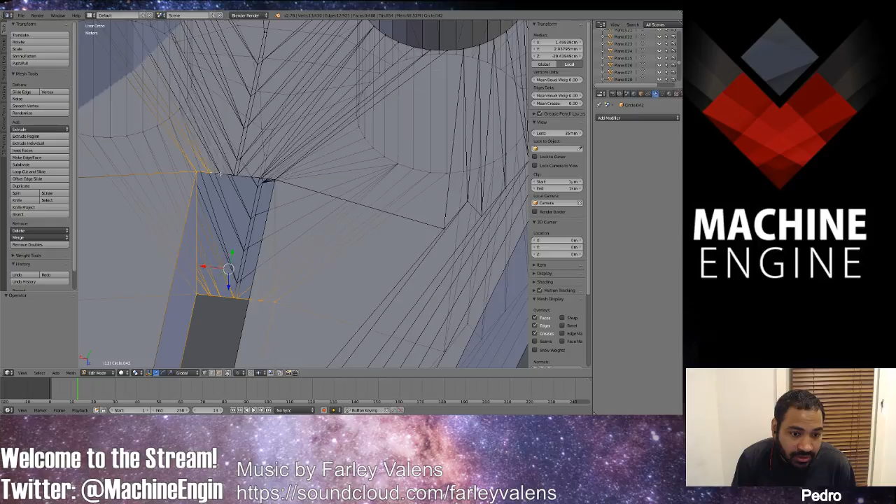I wonder, can I do this? Dun dun dun dun. No. Or can I just do an F? No, it's not gonna do the edge loop thing. Let me see that, it's not gonna work. Yeah, see, if you do the edge loop thing, select, no, it's not gonna work. So I think I'm just gonna do F. Yeah, it worked. F makes a face, F for face.

Okay, so it seems to be correct, but it's going in a weird direction here. It's a stupid block in front of me, but here we go. I want to get this out of it, make it more straight, so I'm just gonna grab this and pull it out.

Yeah, that's fine. Grab this guy, pull it out. And there we go, we have our Siamese twins. Holy shit, look at that shit. It actually worked, wow, amazing.

Holy crap, oh yeah, one last thing. Gotta check for the bad things. Ah, 0, 0, we're good. We can print this guy. Yep.

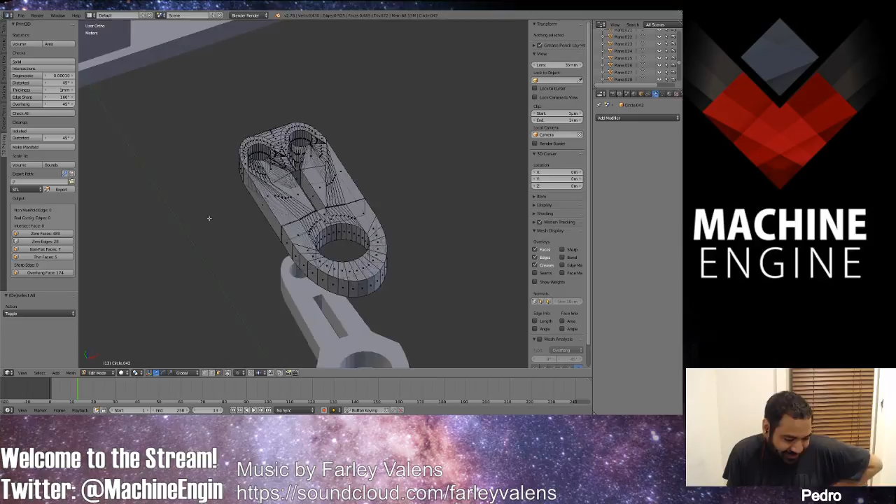Wow, wow, wow, I'm impressed with myself. Look at this crap, amazing. Yeah, and that's what it looks like when you print it. Oh, look at that, oh shit.

See that? There's like a crease there. Yeah, that's what you get with hacking bullshit. Look at this, doesn't really matter. It's just because I pulled it out and I didn't change the direction of this. See that? Doesn't really matter, so it has this little thingy there. I mean, I can fix it easily.

I mean, let me show you, let's check it out, look, see? There you go. Do this side too? Does this side have it? A little bit, ah, fuck it, just a little bit, just a smidge. There you go. It's probably gonna, you're probably gonna still see something, but not as bad. See that? Yeah, you see something, but it's not as bad as whatever. You won't see it in the print, it's too small for the print.

Yeah, it costs a bit more time. I mean, yeah, you could do this in like... yeah. I mean, let me see.

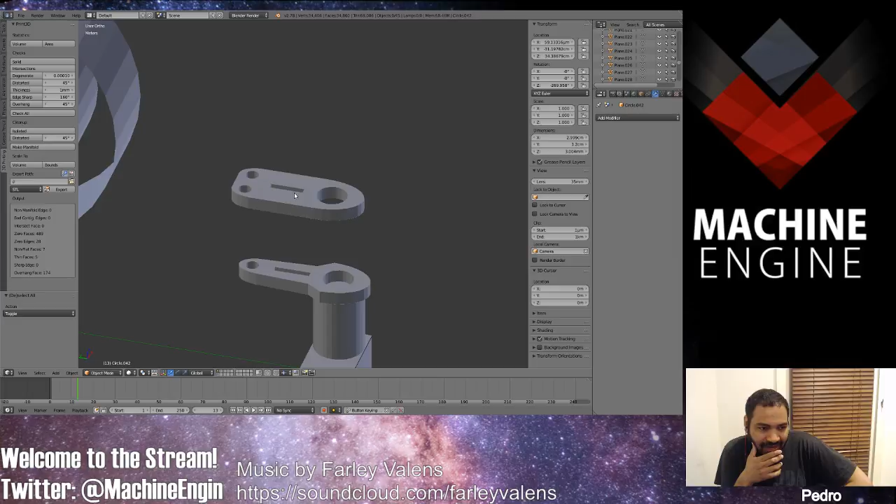The other way is to make a square and then punch 3 holes in it and you're done. Well, 4 holes, this guy's there too. But yeah, that doesn't always work because the Boolean thing kind of messes up. But this is without the Boolean crap, and you make a perfect model right away. So yeah, but yeah, look at that.

From 2 to 1, join them. So now, the reason I was doing all of this was because now I can just... oh shit, my mouse fucked up. I can just... like that. Hey, where's... holy shit, it's way up there.

Oh, that's why I was fucking up. My origin was in the wrong place. Earlier I couldn't turn it, but that's because my origin... there you go, set origin to geometry. My origin was like way up there, so when you turn, the camera's like turning on this long pivot, and it's like the object is here, it's like rotating like that, but you have to put the origin in the object, and then it rotates like, you know, whatever. That was what was fucking me up earlier, man. It's crazy.

Okay, there we go. Let's see. So now if you put it here... crap, and then replace this with the wires that I'm thinking about replacing it, then it's gonna work. So that's cool.

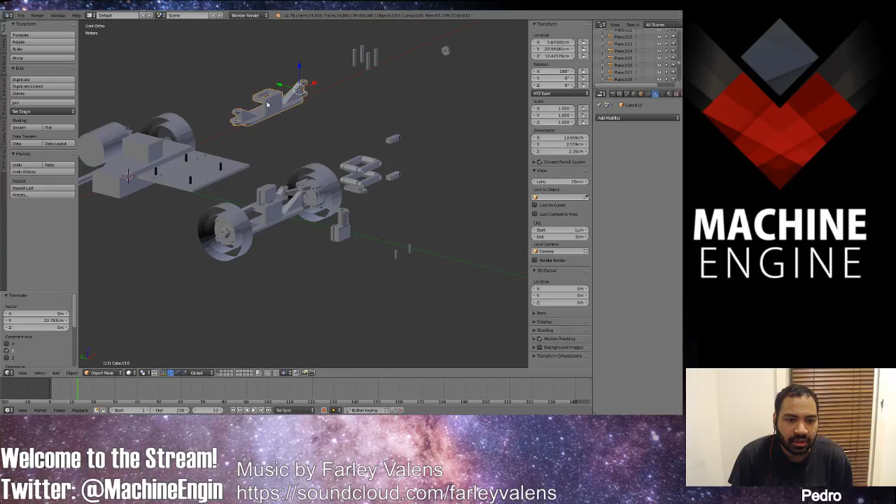So actually, that's pretty much the assembly. I can go show you guys how this works on the inside actually. Oh shit, where's the... where's the thing? Oh no, there, this one. Oh, I thought I lost it.

Okay, here's the one with the attached servo mount. And the one that's here is the one with the detached servo mount with the holes in it. So we can remove the servo mount and whatever. I think we're gonna print this one out first. Maybe we're never gonna print this one, but whatever, we'll see.

But anyways, the idea is, we're not gonna print this, just gonna cut up some wire and put it here. It's pretty sturdy wire, so when you bend it in this shape, it's gonna stay in the shape. So you can just kind of make hooks and make it hook into the holes, and it'll just pull. And the good thing is that it can go up and down, and it can go in anywhere because it's like thin wires, and it's gonna work.

If it doesn't work, we can still print out this part, and it should... well, this is definitely gonna work, but I'm gonna have to make a hole here. Shall I punch a hole in it now? Yeah, I'll punch a hole in. Let's see, how fat is this guy? And I'm talking about the hole.

This is, what is this? This is 3 millimeters. Right, so I need a 3 millimeter. Was that other one a 3 millimeter? No idea. So you go like that. I'm gonna punch a hole in this thing. I'm gonna do the Boolean hole punching. Because whatever, just gonna do it.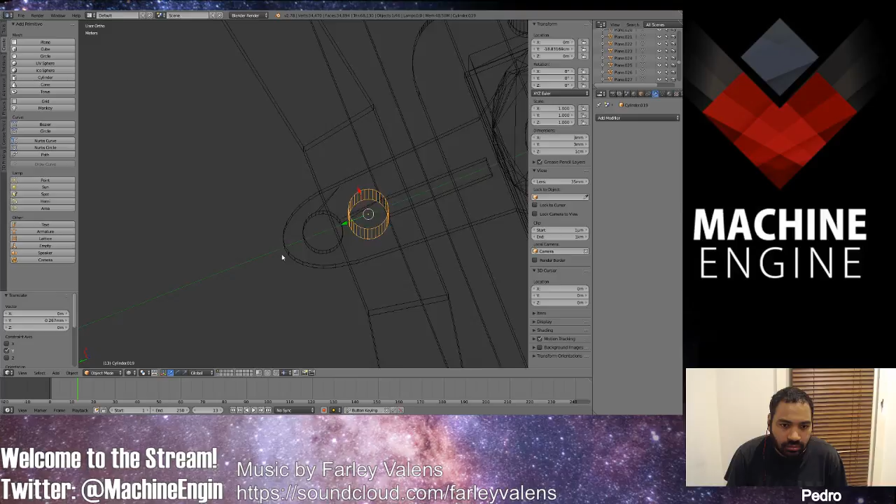Actually, I don't think this pivot is needed anymore. Oh no, not that, this not pivot, this thingy. I don't think I need to put it that way. I mean, it's bent, you see, it's bent. It's going like that. I think I can just put it back straight, and...

It'll probably work fine. Or I can pivot it this way. Oh yeah, I think this way is better, because then the link, the arm's link, can go like that, and you can have an L shape. Yeah, I think this way is better. Yeah, I'm gonna do it like this. Oh, getting a... yeah, I think this way is better. Hold on.

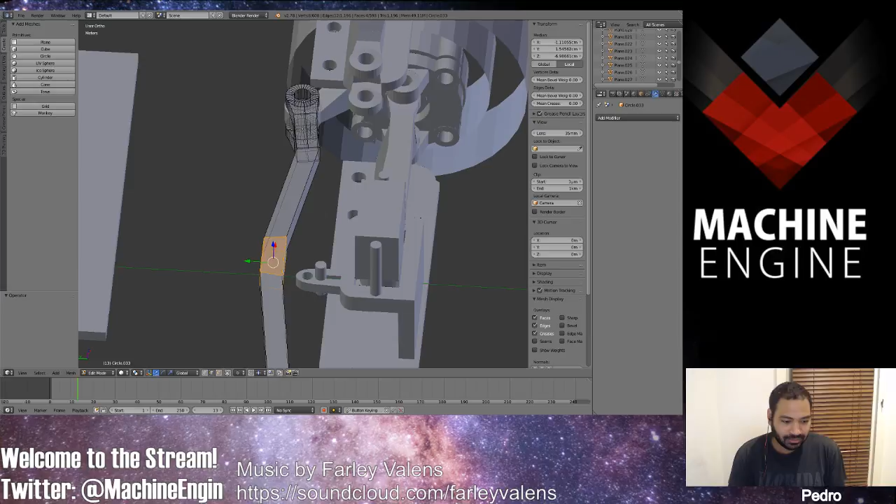So that's what I'm messing with. The joint has to stay in an L shape. So to do that, if I put it straight here, you can't put the L shape correctly, it's gonna kind of mess it up.

So pull it out a bit, and then you can put an L shape, because the servo arm is another thing. Let me get out of this and rotate this. The servo arm is gonna be like here, something like that, and then you can have the link go there. But if you have this, oh no, not okay. There, the servo arm's gonna be like that, approximately.

Let me select this, can you see with it? Yeah, it's kind of visible. You see the arm here, the servo arm, and this. Then if you put the link here, yeah it could work, but it's a bit too close. I don't like it that close.

So pull it out a bit, it's a bit further away, and it gives you a better travel on the link. Basically it allows the movement to not get stuck, and gives you better travel on the link. But you could do this, you could do it because it's still an L. It might work, but I don't trust it that much, I'm not too sure about it.

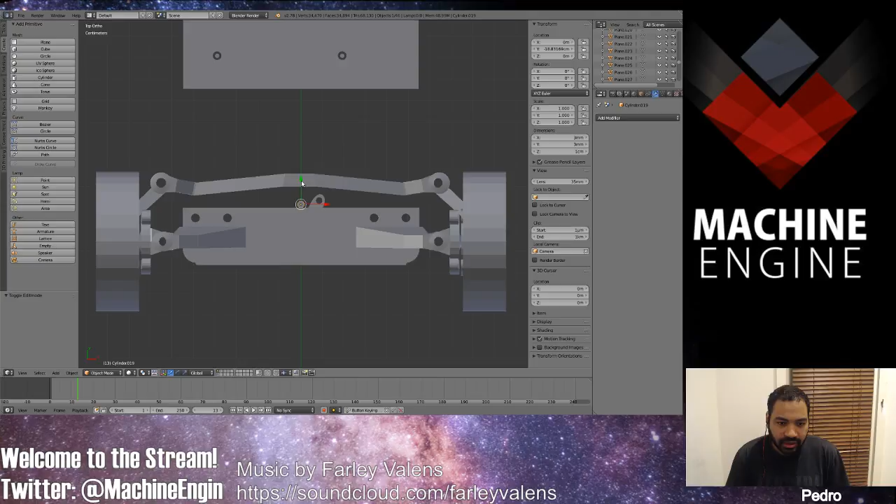Okay, let me get back to this whole business. Go back to solid. So this guy is gonna be our whole thingy. Put it there. Let me go back to wireframe so I can see where I'm putting this thing. Oh, it's not centered.

That's weird, it's not centered. This guy's kind of messing up. Let me try something. Yeah, that's weird, okay, this guy, pull it in. There you go, this guy, 3. Okay, there we go, now it's straight, now it's centered. Okay, that was weird.

So anyways, that's fixed. Now go back to this hole, we're gonna do the Boolean thing again. So grab this guy, let me do the solid. Is it inside? Oh no, it's not, let me pull it through.

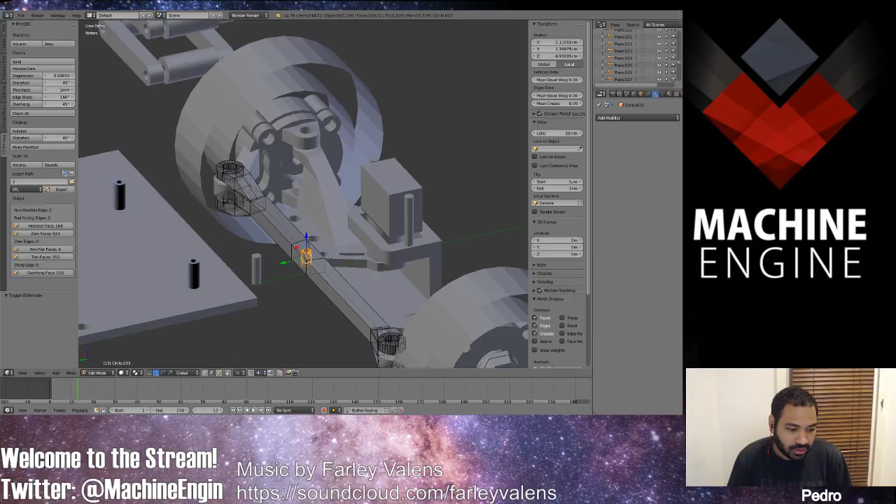There we go, so that has a hole now, 3mm hole, just like this guy. So that means our link, because we have a link that fits exactly into this one, the other side of the link is gonna fit exactly in here. So it's gonna work out.

Yeah, let me see, yeah that's cool. Actually, I'm thinking I'm gonna change this up a bit because I'm not really happy about that curve there, it's kind of messing me up. So I'll just pull this guy out to here.

Yeah, that's fine. Wait a minute, where am I pulling? Yeah, pull it out to here, and then do the same here. Where is it at?

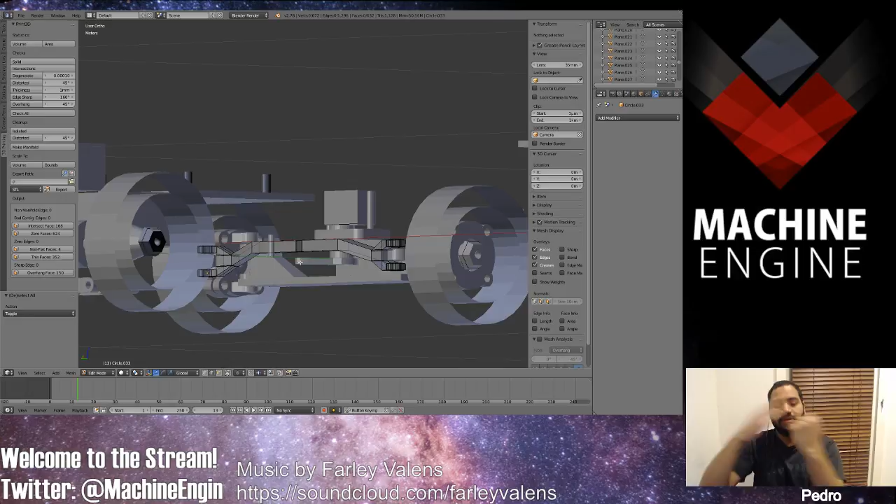Three centimeters, there we go. So now it's straight. If it's not straight and you have a link going in, it might at one point turn and block it. So have it straight so the link can move freely under it, because if you have a curve like that, it might hit it. So pull it out, make the thing straight, and this way the link has more freedom of movement. It doesn't really change the dynamics of the thing much.

Yeah, so that's that. Looking good. Yeah, there's a bunch of crap in the way. Unbelievable.

I think this is already done. These holes, they're gonna go on the thing there. This is already done, so I was gonna show you the insides of this guy. Basically this is the ball bearing that we have. I modeled it inside here so I can build around it, and then I built this guy around it. This is where you put the ball bearing in. See, this has holes, and this is where you link the steering, so it pulls like that. You push it like this, and on this side you put the wheel, and on this side there's nothing. Then there's this cap, you put the cap on it. It also has a hole there, and the hole has a purpose. Then this part goes on the swivel, you screw it like that.

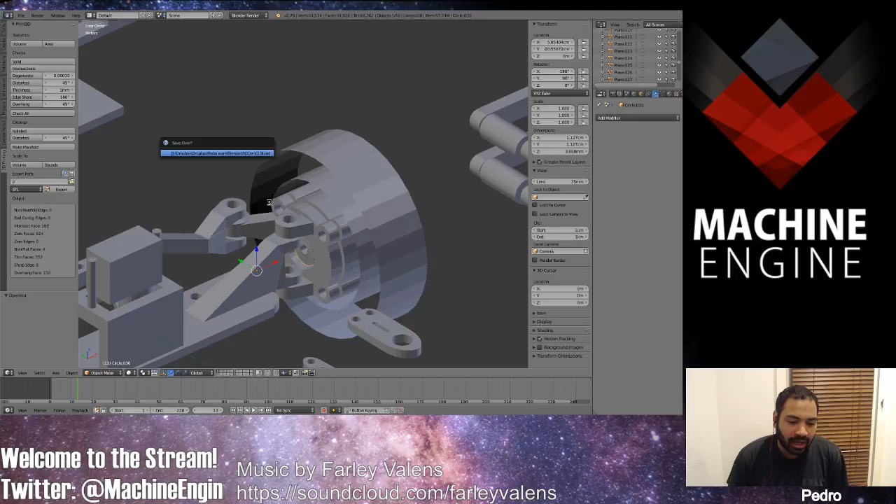And what I didn't print out last time is this. This is the joint for the wheel. The wheel goes on here, we screw it on, and then this part goes into the ball bearing, which is then on this side. This goes on the other side with a screw in it, but I don't really need this part. I probably won't print it because I figured out that I have some spacers that fit exactly and do exactly this, so I don't need to print this part. But I might print it just to test if my idea worked. So that's how that works.

The wheel is gonna rotate around this whole assembly, like you saw in the pictures earlier. I can show the pictures again, though they're just a test. This is the wheel, this is the test print. This print is different, it was way too deep. I thought the ball bearings were one centimeter thick, but they turned out to be 7 millimeters thick, so I had 3 millimeters of wasted space. So I tightened it up a bit. This part was too thick and was colliding with the wheel, so I fixed that. But anyway, that's what it looks like with the ball bearing in it.

And you pretty much just, yeah, that's the other side. You pretty much just fit it within the wheel, this is what you do. You screw in the wheel from the other side into the unit. Oh, that's the broken printer. But here you see it's clipping, so it didn't work out that well. This is just a test print, but the idea is actually solid.

It's gonna work out on Friday, we're gonna print it out on Friday. Man, this printer is so bad. Look at these shapes, look at this crap. Man, that Ultimaker 2, look at this shit. Look at this hole, it's like jaggedy holes. That Ultimaker 2, man, what a piece of shit. Scumbag printer, look at this crap. Man, I can't wait till my printer's fixed. Our printer's fixed now, we can print normal shit. Well, yeah, it's broken, look at it. It's dead, but it's fine. Whatever, no big deal.

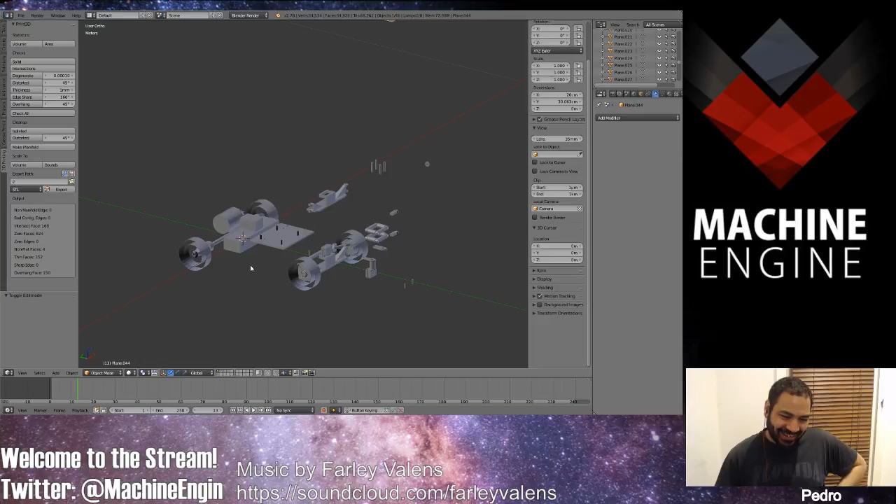Yeah, exactly, gotta put a hat on it. Put a hat on that printer. Yeah, and like put it like burning money or something. I don't know, something like that.

So this is pretty much the size of the car. Still have to build out the chassis, don't really have an idea for that just yet. Positioning the motor in a different location. The current motor assembly is in here somewhere, if I can find it.

No, that's something else. Oh yeah, there it is. Here's the current motor assembly. You see the wheel there, I punched a bunch of holes in it with this huge hole-punching thing. Boom, in one go you punch all these holes. But anyways, this is the current assembly.

It's pretty crappy, the ball bearings here are just held by friction, there's like nothing really holding it. This is really shitty, man. It's amazing, it still works and works actually pretty well. We had zero issues with this design. I mean, well, okay, one time it crashed and broke here, but then I fixed it and it never broke again.

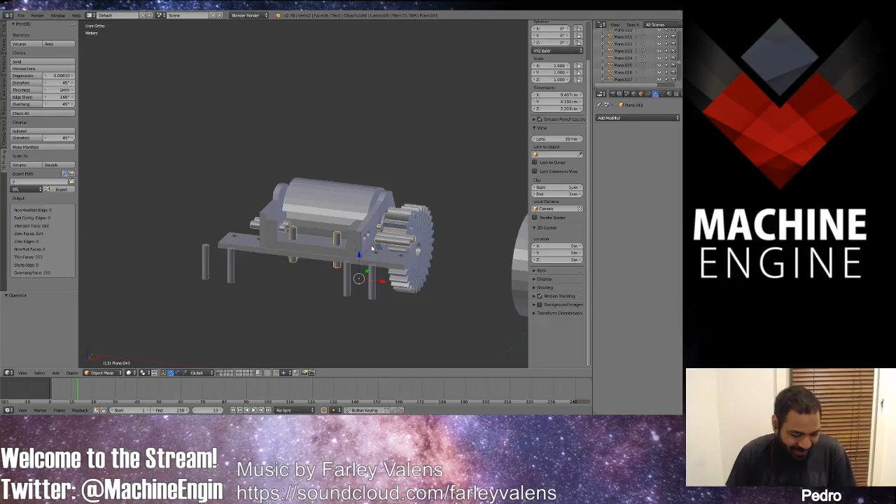Yeah, it's a shitty printer. Whatever, I didn't like it, ripped off a bunch of stuff. It's terrible. But oh yeah, this is the motor, this is the RC motor.

So I changed the position on this because I put the motor kind of angled before. Now I'm gonna just put the motor on top. I mean it doesn't really matter, I could still change the position though. On top seemed fine I guess, but maybe I'll put it more in the middle, like a mid-engine. We'll see, still not clear on exactly what direction that's gonna go.

Anyways, this stuff is ready for printing for sure. So we're just gonna print it out on Friday after I fix the printer.

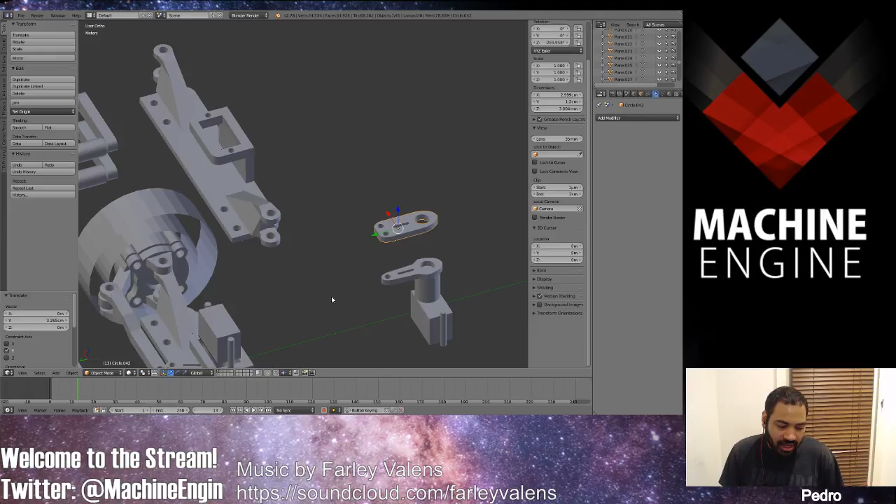Let me save a bunch of stuff. What else did we do? Oh yeah, we fixed this, now it should work fine. Well, fine, properly fine, whatever. There might be an issue with the distance here, but we'll figure that out later. Whatever, doesn't really matter.

Yeah, the wheel assembly is pretty much fixed. So that's it, that's all I wanted to do today. Next time we're gonna try and figure this stuff out. I mean, I put the stuff in the general places.

This is where the Raspberry Pi is gonna go, mounted on top of this plate. This is the battery, I don't even have an attachment for it, I just modeled the battery and that's where it's gonna go, somewhere. This is the ESC for the battery, it's gonna go somewhere too, whatever. I didn't even model the battery for the Raspberry Pi, it's not even on here. Here's the motor, modeled the motor.

So that's that, the gears. I'm gonna be using the same gears, but I'm just gonna print new ones because these ones are getting all raggedy. This is already actually the same.

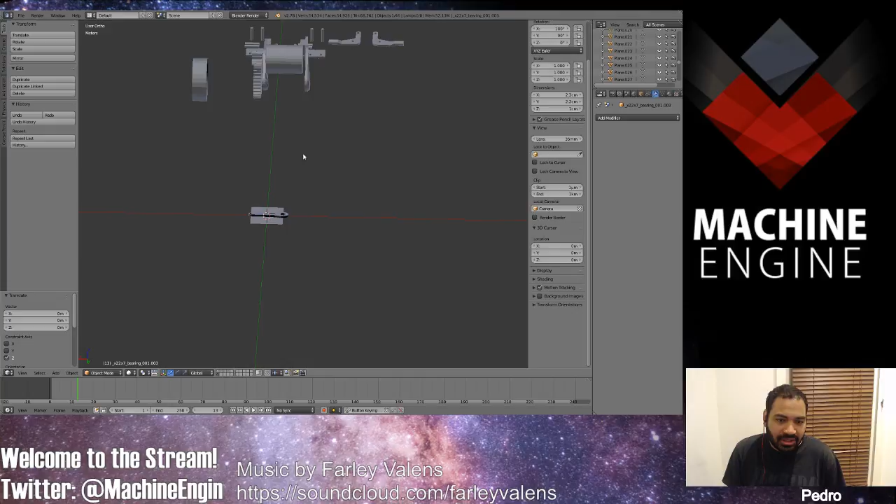Oh yeah, here's also something I was thinking: in the current design of the motor unit, the ball bearings are pretty close, so it's pretty much like putting something on the end of a stick, and then it's wobbly. It has a tendency to wobble a lot. So I was thinking of pushing the ball bearings further out, putting them here, so it reduces the wobble. That does change the dynamic a bit, and I have to figure out how to get this fixed.

I have to figure this out because motors hate it when you do this. The reason it's like this is because you need to have a direct link here so that the motor and the gear don't separate, or else you're in trouble. So I need to have at least that with a ball bearing there, preferably.

But I also have the problem of this assembly being way too wobbly, so I need to do it like that. What I could do is move the ball bearing back here to where it is now, and then have this one out here. You still have kind of the advantage - you only don't have it on this side, but it's still wide enough to keep the whole thing from wobbling all over the place. Yeah, could do that.

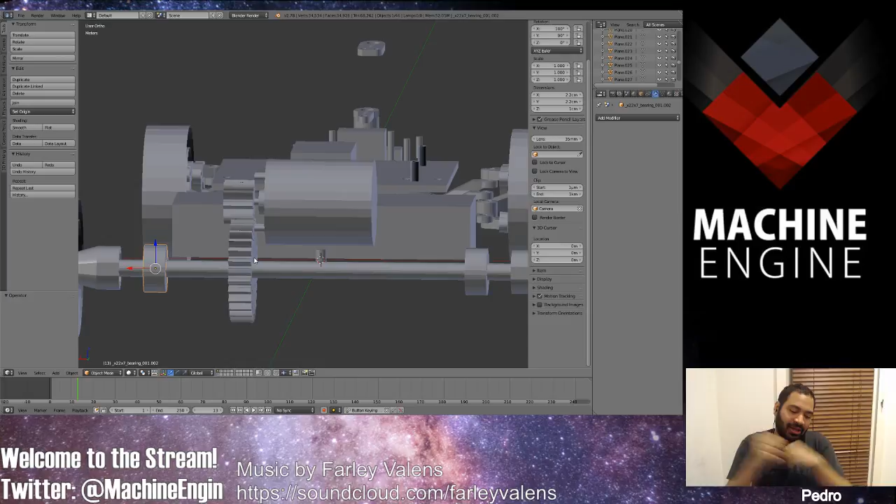Or could I introduce a third bearing, because I need to attach the motor here. I need to attach it, or else the gears are gonna start bouncing off each other. I need to have a plate here to prevent the gears from moving off, jumping up. That has to happen, I need to figure out how to do it. But I wanted to have the bearings out here like this for more stability in the rear axle, because right now it's attached and really thin, and it goes out really far - you can see it.

Oh, can you? Oh shit, no, I see it doesn't have a tube in it. What the hell? But yeah, you can see here - hold on. Oh, that's weird, what happened? Where's the tube?

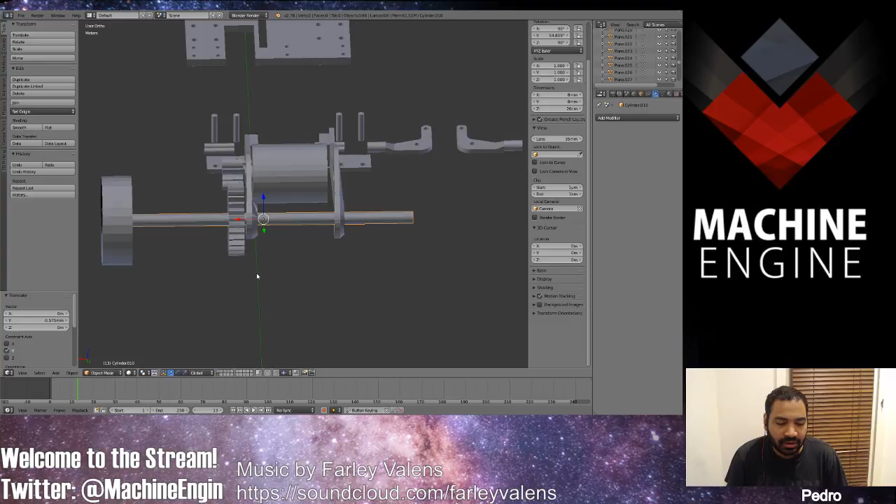So this is the current setup, and this is way too thin, and it's causing issues with it moving, twisting, too much twisting. So we're gonna change that up. That's why I want to have the ball bearings out here.

The problem is also that this rod we're using, we just found it somewhere. So actually it might be better to just cut the rod. We'll see about that - maybe we should just cut the rod, because we found a rod that was like, it's fine, keep it like that. I modeled the rod in 3D - this is the actual length, and with all the stuff we put on it, it's kind of long. Maybe it's better to just shorten it up, make it short, and then we won't have those issues. Well, that's not that much, so we'll see how that goes.

But yeah, that's the stream, I guess.